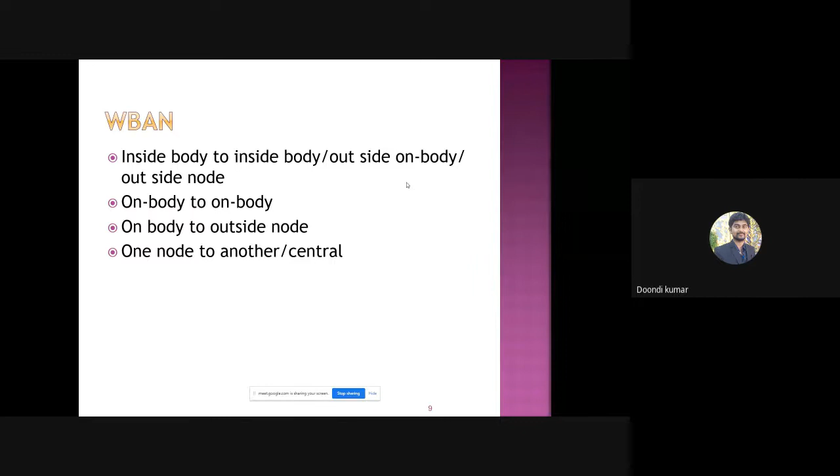Now, the main thing any researcher struggling to work with flexible antennas faces is doubts in software: how you actually make a flexible design, how you actually work with a human phantom. You have a design and a particular flexible material, but that material may not be available in the libraries provided by our EM simulation tools, so how do you give it those properties?

Normal antenna design is something the majority of people are aware of, but when it comes to SAR settings, some people still have doubts how they can actually get the SAR setting in the software and get the SAR analysis properly.

And the most important thing is how to bend perfectly. Majority of the designs, when bending, the people working on bending who approach me also fail in one aspect: when they design the antenna, the simulated antenna and the measured antenna results are not in good agreement. There is a lot of deviation. This is the main problem they are facing.

So there is a difference between simulated data and measured data. That is because they are unable to make a proper bend. So how to do proper bending is the main concept one should learn when working with flexible antennas. That's what I'm going to stress first, and I will show you the required formulas to make a perfect bend, and then we can go further.

Before we go to the software, I will directly take you to the software and show you how to do it. After showing how to do it, and how we can get the different analyses, I will show you. First, you have to make a perfect bend. These two particular slides - if you thoroughly learn them, you can work on any kind of flexible antenna, any kind of conformal antenna, not only for medical applications but any kind of application.

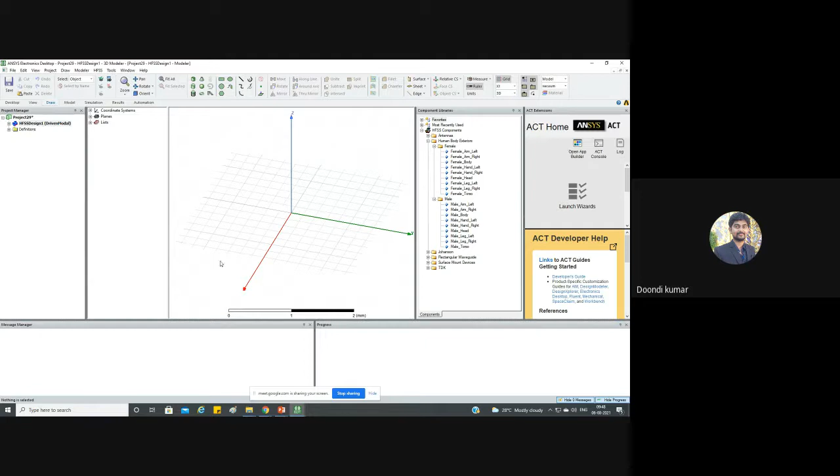So now I am going to make a cylinder here. So in this plane, that will be the YZ plane, so YZ plane I am selecting. Now I want to make a cylinder here, so take this cylinder from drawing cylinder. Click once, drag once, and again drag one more time and click. So you will get a cylinder.

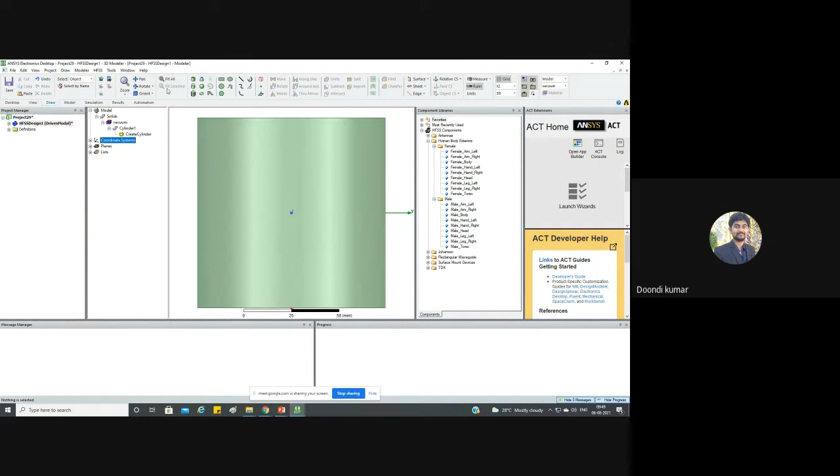Majority of my models, I will try to make the cylinder. So suppose if my width of my particular antenna substrate is 10 mm, I will make sure that 5 mm is on that side and 5 mm is on this side. So I always go in that way. So I will simply make minus 50 comma 0 comma 0, radius I will take some 50 mm, height I will take some 100 mm. So width of my antenna is 100 mm, and bending radius is 50 mm. This is the cylinder I have made.

Now I am coming to XY plane again. So this is the cylinder we have made. Now substrate thickness of my particular flexible substrate — you could take polydimethyl siloxane or some other flexible material, cloth, jeans cloth, or any flexible material you want to work with. So particularly suppose I am taking 1 mm or 2 mm thickness.

Let's select that particular cylinder, Control C, Control V. Just add 2 to your radius, and you are getting one more cylinder on top of it. Select the bigger one and then the smaller one, and you have all the options here. If you are using a lesser version, we are currently using the 19th version in our laboratory, so if you have a lesser version, just right click, edit, boolean, subtract. Otherwise you will have it directly here itself. So subtract, press OK. Now you have a bended cylinder.

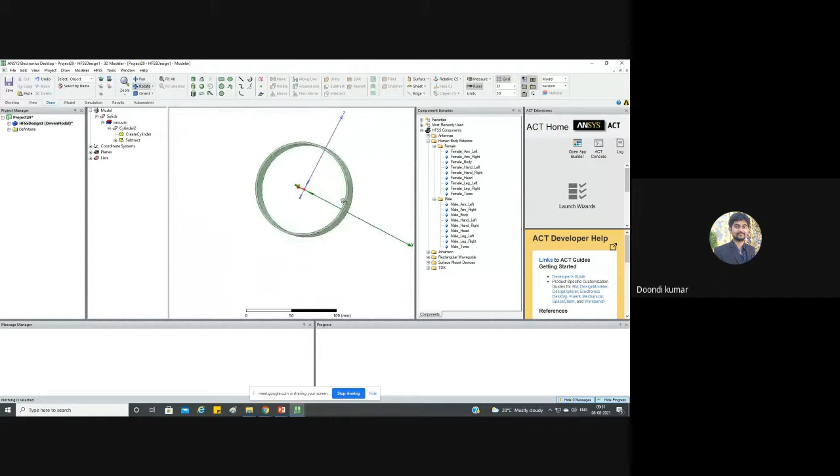Now if I want to cut here, let's give a little bit more width here. So if I want to cut here using a box, I have to draw a box again - dimetric. So I'm taking a box, I just clicked on it like this. Now this box, my X direction is 100 mm.

So minus 50 comma, exactly at X minus 50 I have to join, because minus 50 plus 50, total 100 diameter we have taken. So minus 50 plus 50, so X size will be here 100. That's what I'm trying to say. Here Y it will start at center.

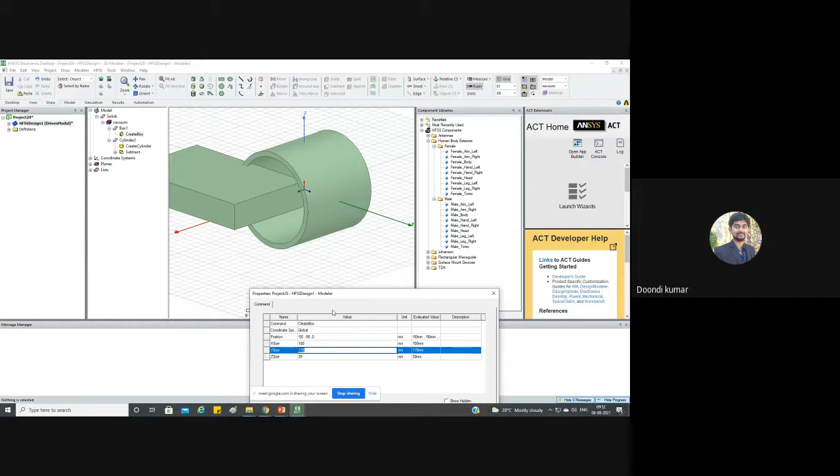Now front - if you see, definitely the inner length is less than the outer length. So in this aspect, I have developed one of my designs. I made one design, and from that I have taken double layer, triple layer, 4 layers also, because when it comes to phantom models we will be taking 4 layers like skin, fat, muscle, bone. So I have completed from single designs to 4 designs. I will show you from the single design front.

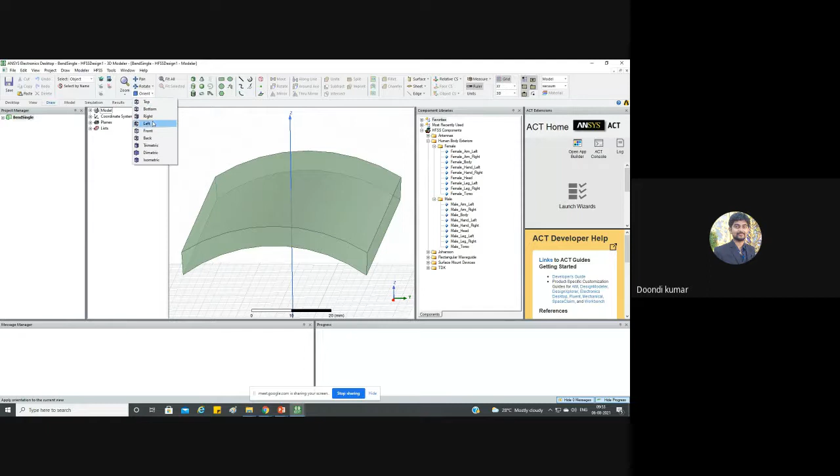Now this is my design. Let's go to our properties, design properties. See, these are the things that you will be requiring.

See, my radius is RA 40, so directly RA is nothing but R by 2 in our equation. Sx is nothing but width of my substrate, 100. Sy is nothing but length of my substrate, 50, and h equal to 5, that means substrate thickness. Here theta 1, theta 2 - as shown in the previous slides, theta 1 equal to length by 2 by radius into 180 by pi. Theta 2 is nothing but length by 2 by radius plus thickness of substrate into 180 by pi.

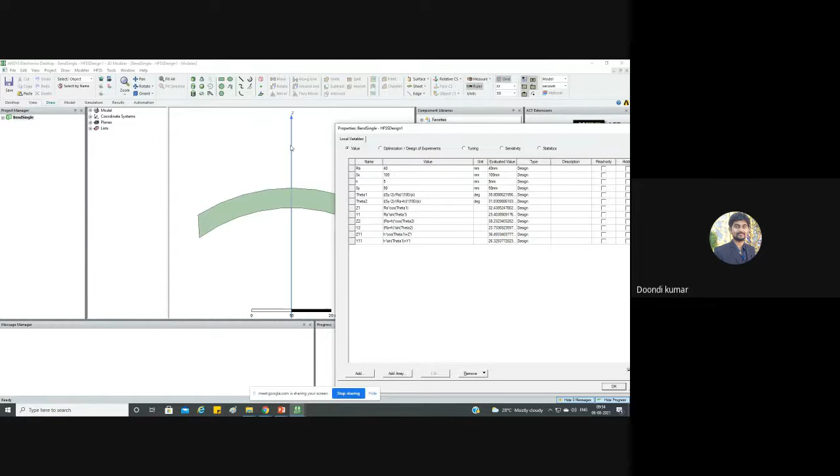Same equation. There x1, y1 - here the orientation I took in yz direction, so z1 is RA into cos theta 1, y1 equal to RA into sin theta 1. Same equations as what I mentioned in the PPT, only I have given them here. So these are the same equations, we just gave them as variables here. How you give them I will show you in this design, then I will come to this one.

So here instead of all of this, you can give like this. So this will be my Sx. Instead of 50, I will give Sx by 2. That means substrate width, it is length, and I am giving 100 mm.

So 100 mm, press OK. Now here radius is 56 because it is outside one. So original radius we gave is inner radius 50 mm, and height we have given is 6 mm. So here it will be nothing but R plus H. Press down arrow.

Sorry, I will add here and give. So 2 variables, it's not declared. So you can give here HFSS design properties, add, take the radius RR, suppose length units is length mm, and give radius as 50 mm. Press OK. Similarly add height H, I mean thickness of the substrate, again length, and give 6.

Press OK. After giving the variables, you have to give in HFSS design properties, add and give the variables, select the quantity, length. If it is angle, select radian. So here, instead of 50, you can press RR plus H. So automatically 56 will come there. So this is it. Now this is minus Sx by 2.

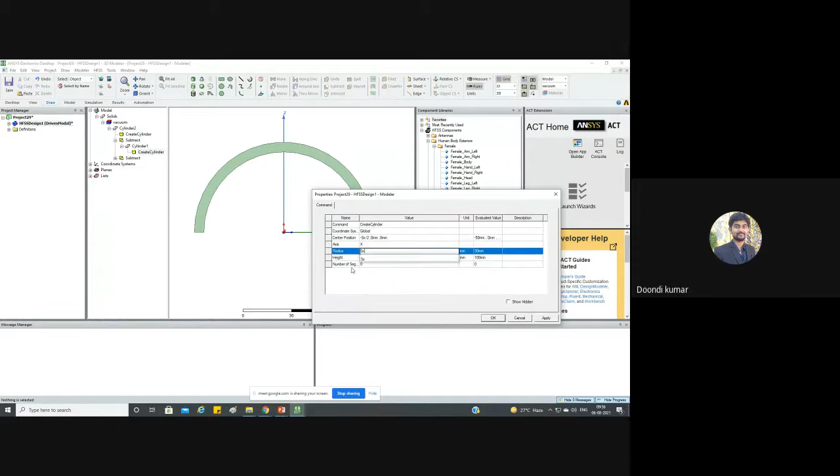Here it is nothing but Sx. So this is how the variables you can give. Now similarly you can give here also for inside cylinder. Here also you can give minus Sx by 2. This will be Sx. This will be RR radius plus OK. In a similar way we can give here also box.

So box here also Sx by 2. This one is RR plus H, sorry, RR minus H. Here nothing but Sx. Here 2 into RR plus H. So double, so total radius you are taking it double. So here again minus RR minus H. So this is how you have to give all the variables.

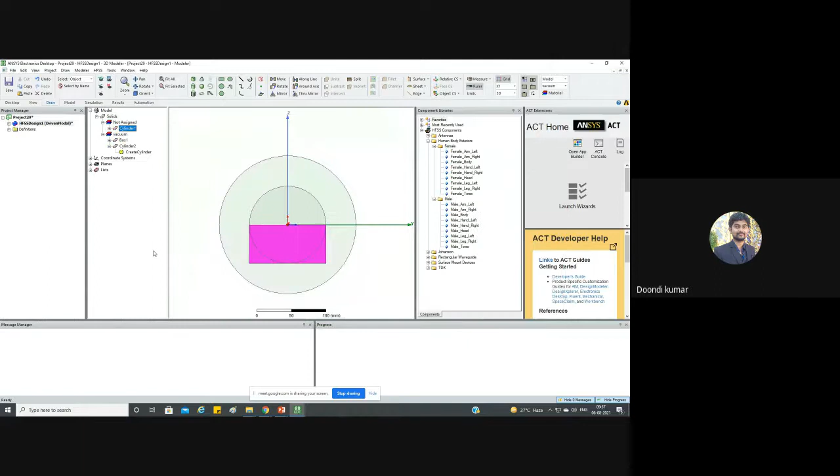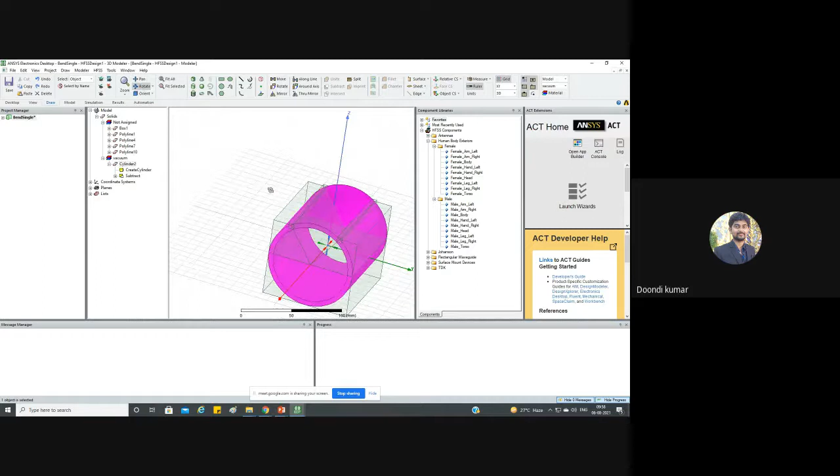So first I have taken only cylinder. Next, I have taken the second cylinder. So from first cylinder, I have deducted the second cylinder. So then I got only the cylinder part, only the cylinder part. So from there I have deducted the box, only this one. So again, then I got only this particular part. Okay, this particular part.

So from center, I have taken the direct lines, as I said. So there will be extra point left behind. But even then we have taken the direct lines and try to calculate both sides. If you calculate this side, automatically this side equations will come. So if you want to know, these are the coordinates that we have given here. So take this one. See, so y double dash and z double dash.

Those are the coordinates calculated for here. So each of those values we have given. So if you are taking one place, automatically left side, if you are giving if this is minus y, this is plus y. Automatically, if you are adding negative side, it will come to other side. So you have to calculate one side, automatically give the negative y only, you change copy paste and you give the y side negative, automatically this side design will come.

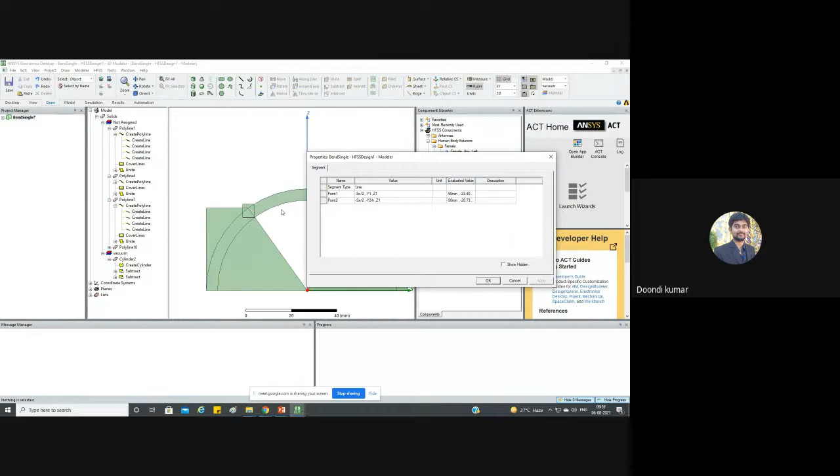So that was the design that we have followed. Similarly for here also same thing. So bottom coordinate is y1, z1. So outer coordinate is nothing but our outer coordinate is y double dash z double dash. The same coordinates are given here. Under this extra, first based on the straight line we have deducted. Now then I have deducted the extra part. This is the design that we have made using completely with variables.

Now if somebody wants to work with 50 mm by 50 mm size antenna, then simply he can go to SX, give 50, SY is 50 already. Radius of bending also, if somebody wants to give 50, enter 50, press OK. Automatically it will adjust. Somebody wants to give thickness only 1 mm. H, 5 mm is there, thickness 1 mm I am giving. See, thickness is changed to 1 mm.

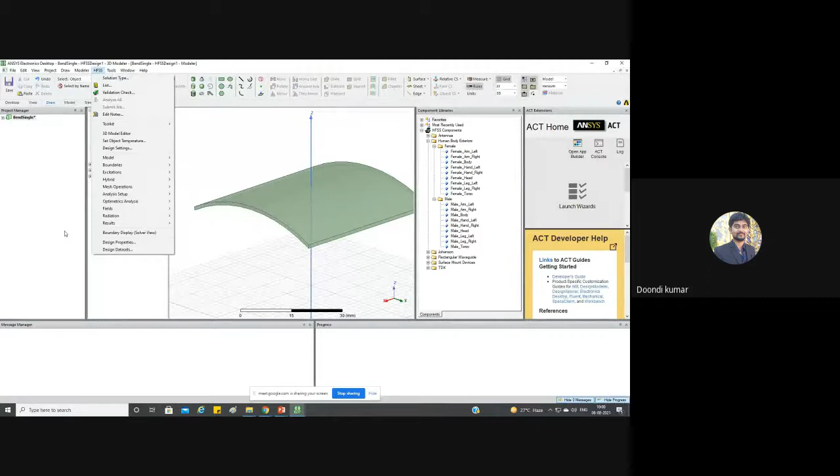Somebody wants to work with implantable antenna or endoscopy antenna and they need a conformal small scale antenna. So in that case, they want only some 7 mm antenna, 7 mm by 7 mm, and thickness is only 0.2, they are giving, suppose. Press OK. So it is almost invisible. You press Ctrl D. See, this is the smallest size.

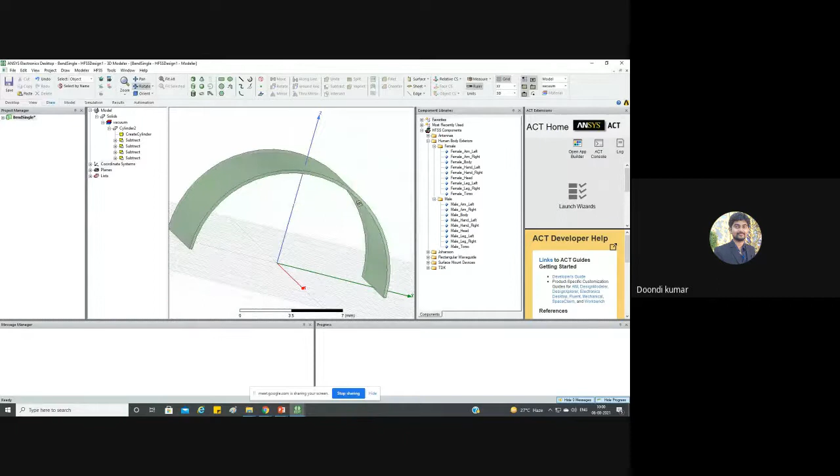So this is just 7 mm by 7 mm, just like a peanut size. Any value you give for radius, overall bending radius, or substrate thickness, or if you want to vary the overall size, everything you can change and you can get your bended design.

Similarly, what I did for the double layer, triple layer is: for the first antenna, the height is h. If I am putting one more substrate on top of it, the radius of the second layer will be RA plus h. Suppose I have only one layer here, and now somebody wants to make a second layer on top of it. They can take the first radius as RA, and on top of it substrate is there, so total is RA plus H. So if somebody wants to put another layer on top, the starting radius of that second layer will be RA plus H.

So the top radius of that second layer will be whatever the thickness is. Suppose H is thickness for the first layer, let's give HT for the second one. Then that value will be RA plus H plus HT, for the second layer. So you just give RA plus H as the radius of second layer, then give the thickness for the second layer and add it for the theta 2 equations. Same equations, you repeat, but give variable names differently, then automatically the second layer will come.

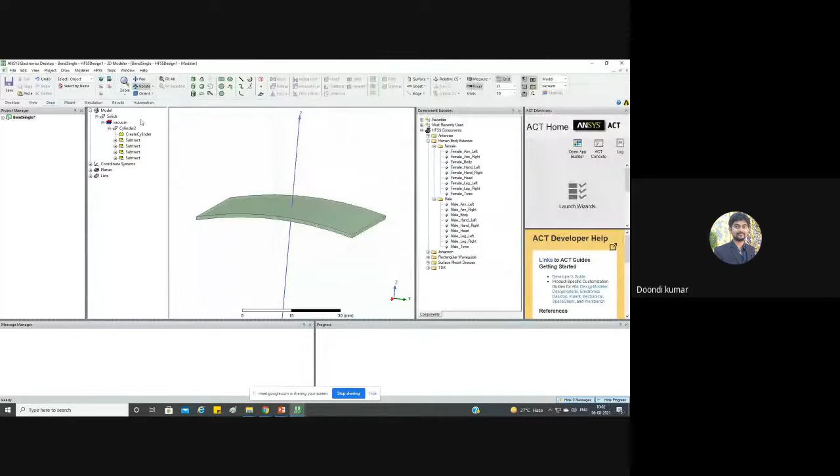Automatically the second layer will come, then you go for the third layer. Just give the variable names differently, and you keep going for 3 layers, 4 layers, any number of layers you wish. This is the perfect bending we have to make if we want our simulated data and measured data to be in sync. This is exactly what we need.

Before we go further, let's see how. So I have my substrate. There will be some materials already inside our simulation tool, but if I'm particularly synthesizing my own material, suppose I'm trying to mix polymer with graphene oxide impurities, sometimes I mix with TiO2, some people mix with Fe3O4, or barium titanium oxide. So different kinds of metal oxides I can mix, so that I can change the dielectric constant of my antenna from lower to higher, around 10, based on the impurity weight ratio I add.

So when making a substrate, I have to check the dielectric constant of my material. There are different dielectric constant measurement techniques and equipment. One of the most commonly used: before we make this polymer sheet, it's usually in semi-liquid form, so you can use the dielectric probe kit to get the dielectric constant over a frequency range from 10 Hz to 18 GHz or 60 GHz, based on the kit you have. So if somebody wants to work with a medical antenna at 2.45 GHz or 430 MHz, he measures his polymer's dielectric constant over frequency, and at 430 MHz he knows the dielectric constant of his material. Then how do you enter that dielectric property value in the software?

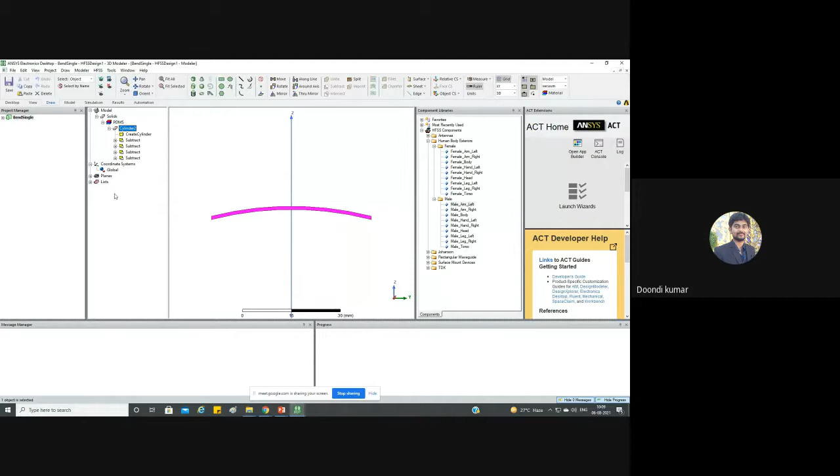So whatever frequency you are working at, you will already be aware. Based on that particular frequency value, what is the decay of your material as well as the tissues, you have to give here. Now I will show you the source settings also, but before that, let me show you how you can actually put the antenna on top of this conformal substrate.

Let me change the radius a little bit here, 50. So this is my radius. Okay, now I am taking a patch. Suppose this is my patch. I am drawing my patch.

So for my patch, I am going to give minus 10 mm, comma. Suppose just I am taking some random value, minus 10, comma, some 60. This is 20 and 20.

Now for it to wrap on top of it, you have to select your substrate first and then select your patch and go for sheets here - wrap sheet. Wrap sheet, for visibility purpose, just change its color. So this is how you wrap your antenna on top of your substrate.

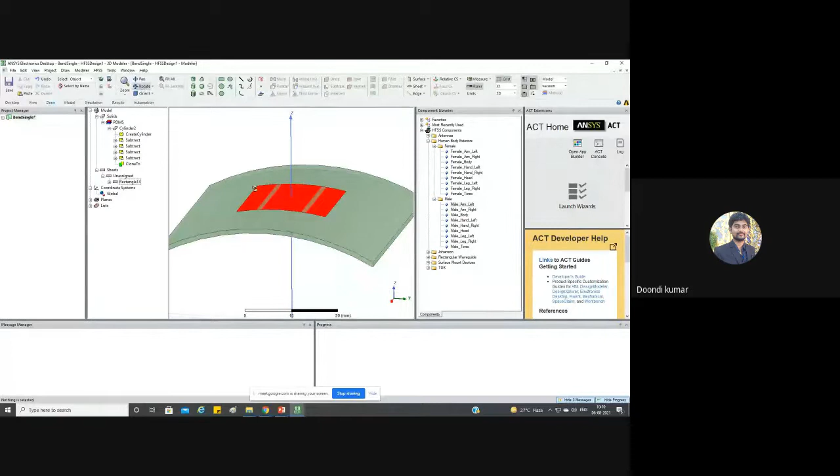Suppose if you are having a ground, then put the ground below it. So I have given the Z value 60. You give the value below that. So I'm just coming back to it.

Now I'm giving just some 20 or something. So now you select it and select again, go for sheet, wrap sheet. So it will come down. But here Z you have to adjust so that you place it exactly at your ground. Based on the length, you have to put it and it will wrap exactly here.

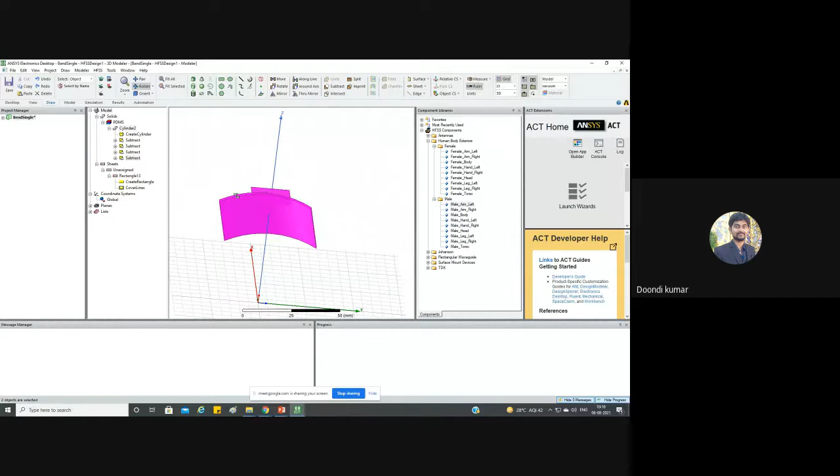So if you want to put it on top, you have to make sure your patch is on top. If you want to put it on bottom, make sure accordingly. So based on your own preferences, you have to put it - whether you are wrapping on the top side or the bottom side, you have to be aware, and based on that, you have to give the settings.

But here, one of the main problems the majority of researchers will face is when you want a different kind of conductive material. So most people will select it directly and give boundary condition perfect E so that it will act as a conductor - that's the simple way everybody will follow. Suppose if somebody wants to give a thickness, and they want to give some copper coating or some silver coating, and place it inside the capsule or somewhere.

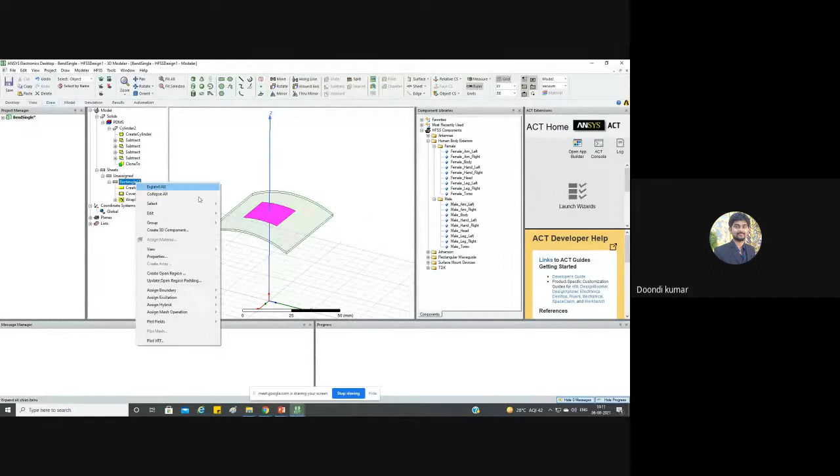So they want to get a wearable antenna, but they want to coat it with silver nanoparticles, with 30 micrometer thickness or some 20 micrometer thickness. For that case, after wrapping, simply select your patch, right click, right click again, go to thicken sheet, give thickness 30 micrometer, select instead of mm, press OK, and automatically it will come.

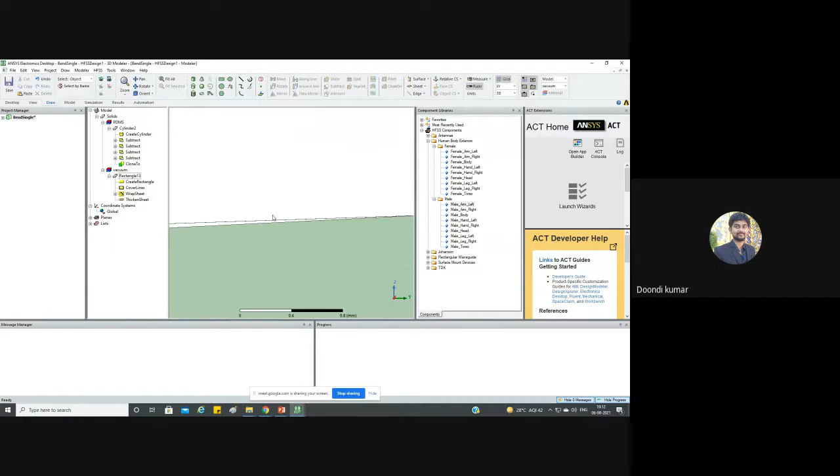Automatically it is assigned into vacuum because it has just become a thickness, so that particular copper foil has become solid instead of a sheet. Initially it will always be vacuum. You select again and go to edit material and do your silver nanoparticle conductivity settings, and it will work.

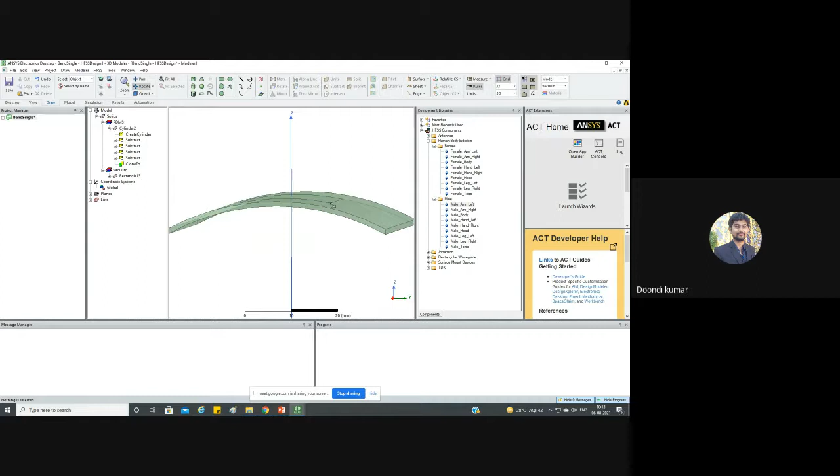Now another thing, suppose somebody is working with endoscopy antenna or implant antenna. In order to miniaturize and shift the resonance frequency lower, because the antenna will be very small, we majorly follow giving vias and using a high dielectric constant substrate as well as superstrate. So on top of our patch antenna, we usually put another substrate, which we call a superstrate, and a second layer will be there.

Now in such cases, this particular patch will intersect with the superstrate. What you have to do is just copy paste the same thing, whatever superstrate material you gave, and give that same material here. Suppose you are having PDMS, put the PDMS. Then from the top superstrate, deduct this newly created patch part, and the intersection error will go away. This is the particular error everybody will face, so whatever intersecting patch portion is there, you have to remove it from the superstrate so that it will work fine.

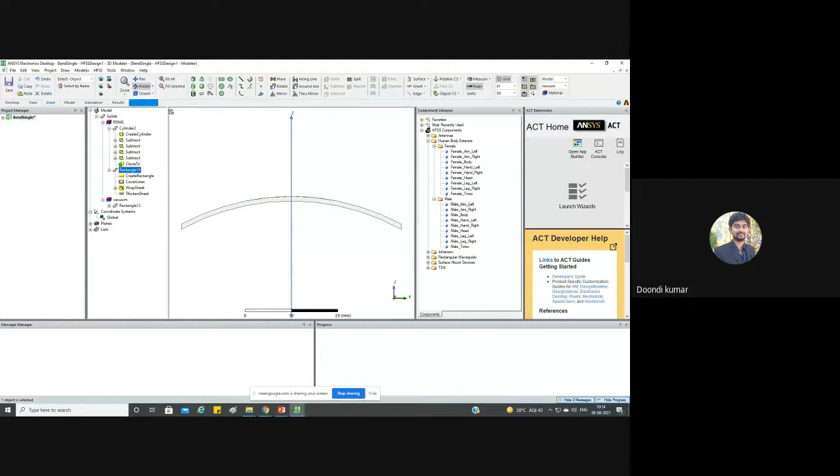Now for a flexible antenna, working for medical applications, you either bend your antenna in the XY direction or in the YZ direction, so X direction or Y direction, two directions one can bend. Suppose I have my strip line here, I give my feed, I bend in this orientation, and I give my strip line and port here. Similarly, somebody wants to bend in Y direction and their strip line is here, and they want to give port here. So this port assignment is another problem majority of the people will face.

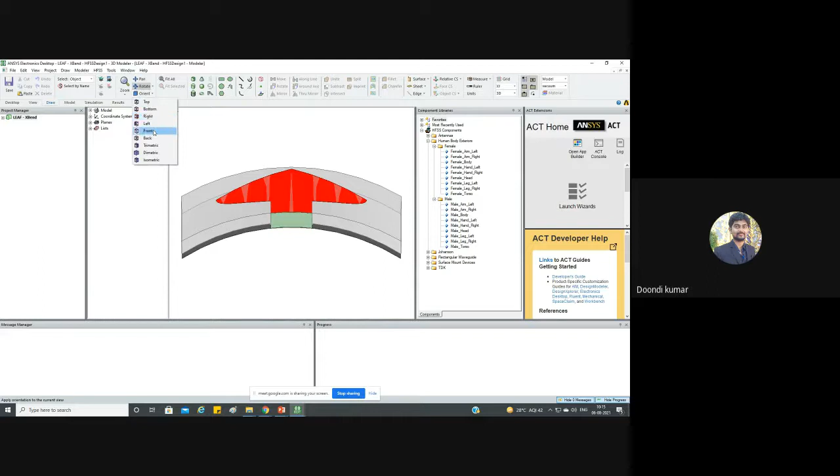Let us see how you can give the port here. In case of this particular X bending, your port is here. Front view, I am pressing Control D. So here the entire model, whatever we have done for 3D substrate preparation, the same 3D preparation I have to do for the particular port calculation in a 2D way. If you follow, instead of cylinder, I will be taking a circle. Same process, everything is the same process.

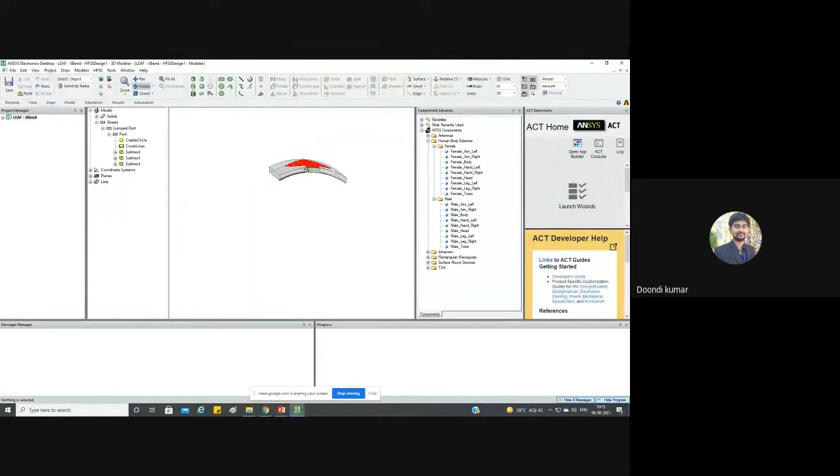So what you are having is in a single dimension. Whatever calculations and equations I used for making the cylinder, the same ones I am doing again in a 2D manner. Instead of taking solids, I am taking sheets. Same thing again, repeat: take the first circle and the second circle, subtract, you will get the ring, then remove the box part, the half rectangular part, then remove that side and this side, and you will get the exact one. This is how the port calculations are made, and this can be given here.

In a similar way, this one is quite easy, because you need to know this coordinate and that coordinate and give a polyline. So in this case, what I normally do is go to right view and take lines: one line, second line, third line, fourth line, and mix the lines. Now I need to give this coordinate and then this coordinate, similarly for the bottom coordinate and bottom coordinate. What are exactly these coordinates? Come to front view, isn't it nothing but x dash y dash in our equation? It is nothing but y double dash x double dash. Same equations only you will be giving here.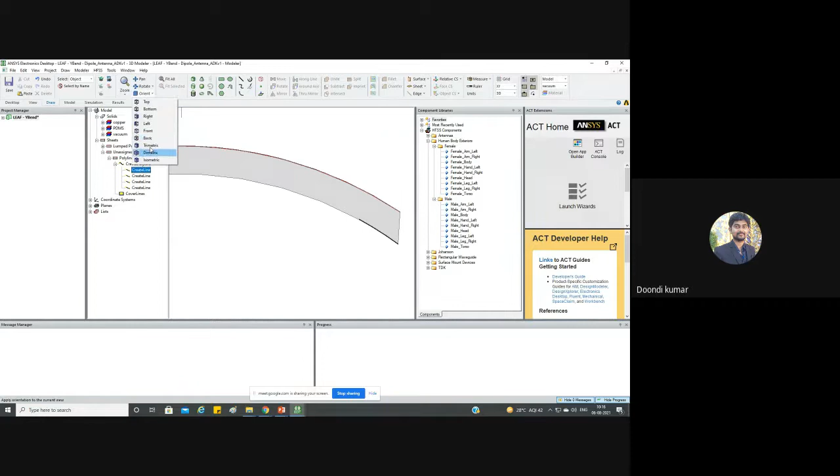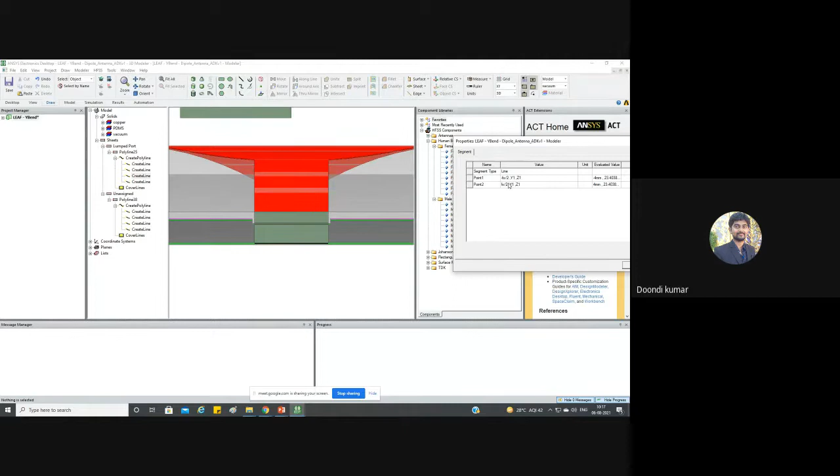And you can see, on the right side I am going again. You can see our port. Nothing special, just because I wanted to give a different notation, instead of double dash I gave 2, so Y2 is nothing but double dash. So top is double dash, similarly for the bottom line, single one is dash. So Y1 Z1, Y2 Z2, same equations that we calculated, you just give them and give the coordinates directly. It will take and adjust as well.

Now the one particular problem you may face here is while giving the excitation, lumped port, and trying to draw a new line, it won't take the line. Because this is actually a slant condition, that port is actually slant. It is bended as per your bending radius, and that particular port automatically bends.

Suppose I will show you, I'm going to change the bending radius. We change the radius to some value, say 50, Control D. See, it's changed, and automatically the port is also adjusting. Your entire patch also will adjust, everything will adjust. So in this case, what you do is select the bottom line, and instead of Y1, you give 2.

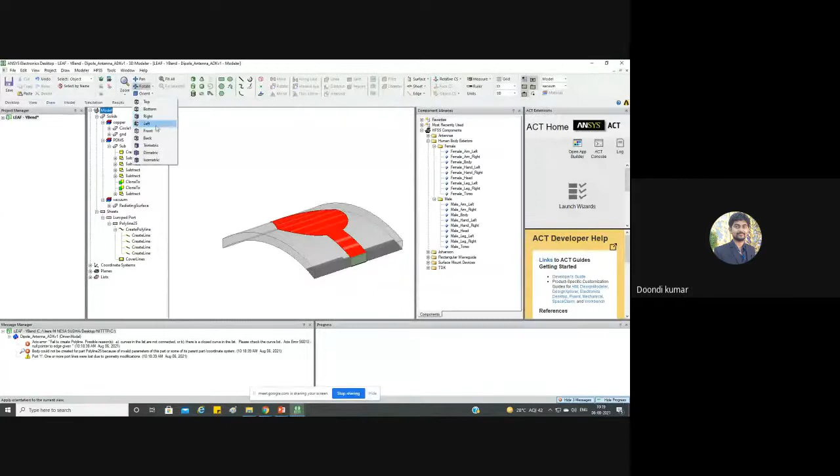See, now instead of slant, it is just perpendicular. So make it perpendicular, and then you can give your feed easily. Make it perpendicular and select that particular polyline. Now you can easily give assign boundary, assign excitation, lumped port, next, length, so you can give it. After giving this excitation, just change this Y2 back to Y1, and then it will adjust automatically.

So again, you can see from front view, it is adjusted. So this is one problem that you will be facing. X bend port is simple, but Y bend port is the problem you will face, because the port line is actually slant. So make it straight, give the excitation, and then again change the coordinate, it will adjust. These are the things you need for making a perfect bending and wrapping the antenna patch or ground, and giving a port and all.

So I also showed you how to give your substrate values, new materials, skin value, or any other tissue value. So here itself I will show you how you can actually give SAR settings also, then I will go to further analysis.

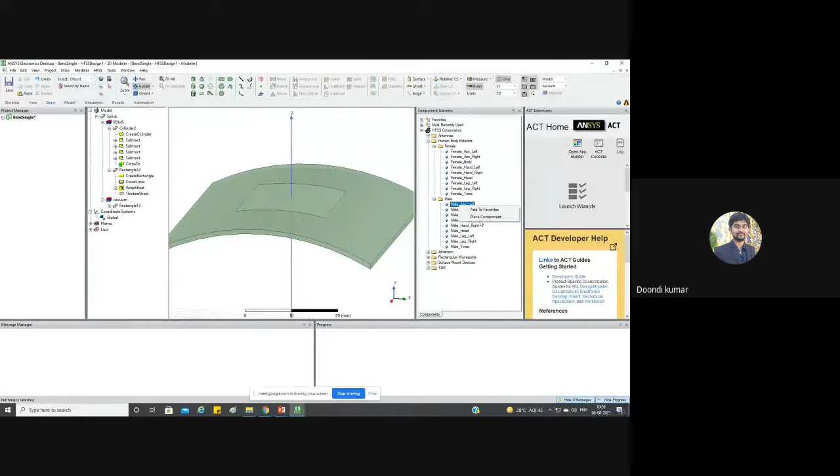So I will take a male phantom, place component, press OK. This has come here, I want to put it here. Now you just take assign, edit, arrange, rotate. First I will rotate 90 degrees, so it is rotated. Again edit, arrange, rotate, so I rotated again. Now I want to move it here, edit, arrange, move.

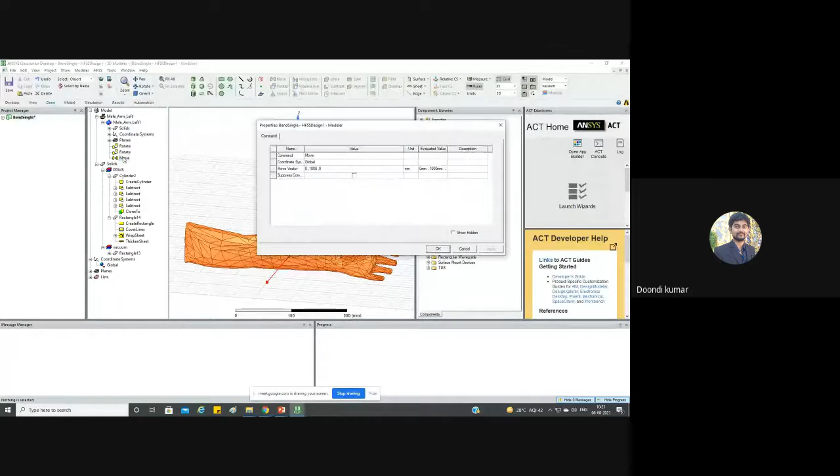So this move option, you can change it here. In the Y direction, you can change some 1000, so you have to adjust it. You can keep on moving these coordinates so that you can actually put your antenna on top of this particular phantom. All you have to do is use the move coordinate option, and give the coordinates, keep changing the coordinate until you place it on the appropriate position.

Once you position it, you have to select your antenna, or your particular part, human body part, and go for modeler, list, create, object list. So simple, this is how you make proper SAR settings. You have to select your phantom model, whether it's skin, fat, muscle, all these things, or you select a head, or a colon, or you can select a torso part. Any phantom model you want to work with, select it, go to modeler, go to list, create, object list. Then this is created into a list.

Now you have to go to fields, SAR settings. In the SAR settings, you will get the object list one, the list we have created. So this hand we created into object list one, that we are adding here.

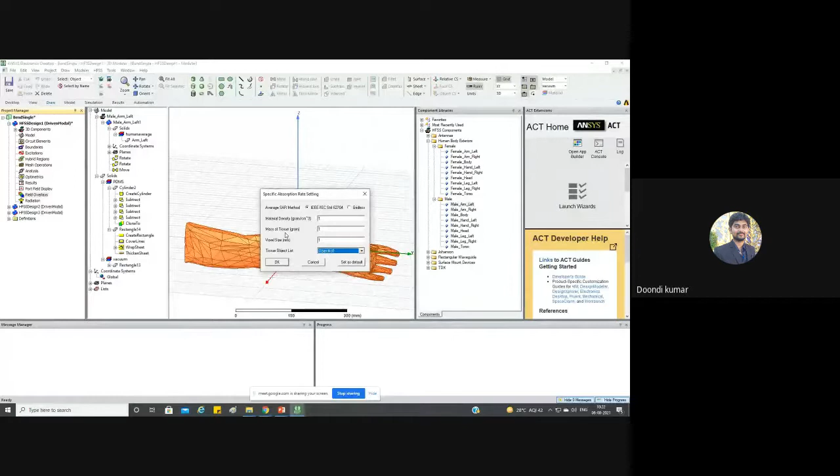As per FCC standards, if you are calculating from 1 gram, you put 1 gram. If you want to calculate as per European Commission, then you put 10 grams. So this is where you change the value, 1 gram or 10 grams, it's up to you. If you want to put both and compare the SAR value over the 1 gram volume tissue or 10 gram volume tissue, it's up to you. As per FCC standards, the maximum allowable SAR is 1.6 watts per kg over 1 gram volume tissue. For the European Commission, it is usually 2 watts per kg, but measured over the volume of 10 gram of tissue. So whether you follow this one or that one, or want to compare both, it's fine.

But usually you have to select your phantom, go to modeler, create list, and then go to field overlays, go for SAR settings, select that object list, and press OK.

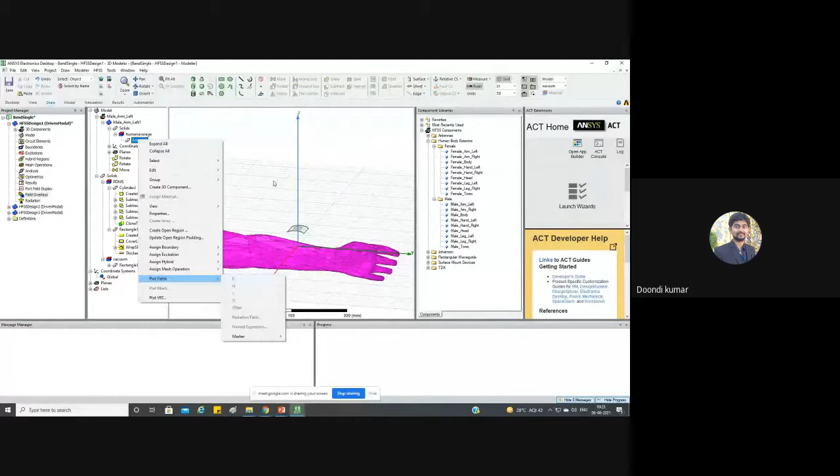Once it is done, you simulate it. After simulation, go for your phantom model, plot fields. Since it's not simulated, it will be highlighted if it's simulated. Others, then you will get the average SAR. So click on the average SAR and press OK. Your SAR will be done.

So that is a simple way to take your SAR value for flexible antennas for wearable or medical applications. These are the basic options I want to tell you. I will go further inside. Let us come back to our PPT so that I can show you a few things, then we can go for biotelemetry and other things also.

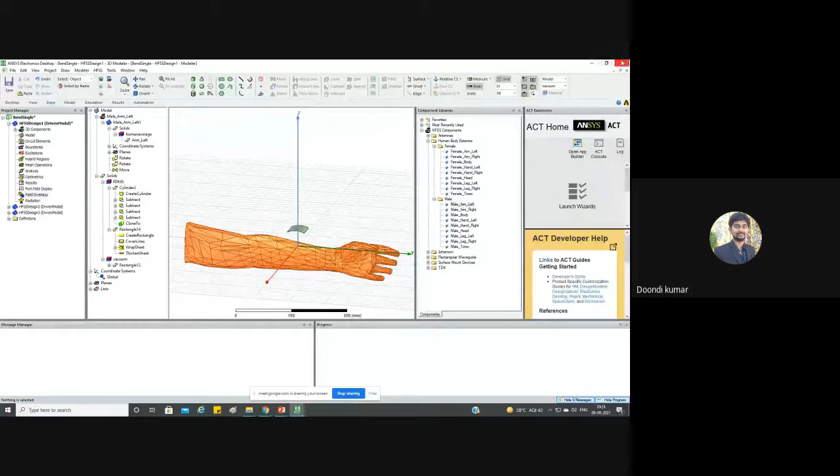So now let us come back to our slides. When you are working with wearable antenna, there are a couple of common things you will be facing. One thing is when you have an antenna, you simulated it in a flat condition, but when you bend it, the antenna may not have the same reflection coefficient. It may shift. That is one point you have to adjust.

Another thing is, suppose I take an example. This is one of my published papers in Wiley. I will show you this, with metamaterial backside and without metamaterial backside. Let me show you results.

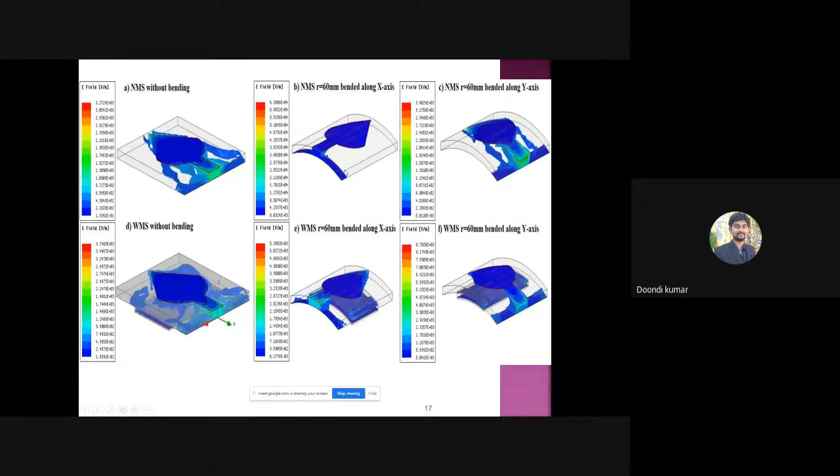So I have taken flat condition with metamaterial and without metamaterial. I have bended in X direction as well as Y direction, so both directions. See, in a flat condition, it is exactly at 2.45, but when I bend it, it is shifting. Whether it is with metamaterial or without metamaterial, in both cases it is bending, and the result is shifting too much. Just to show you the effect, I am showing you this. Then I will show you how we mitigate it out.

Now, effects of human body. Not only bending, the human body presence will also affect our overall radiation efficiency, our overall performance of S11, and impedance matching will change, because the dielectric constant of our human body is usually very higher. Because of that, the overall pattern will change, efficiency will change, because some of the radiation energy is being absorbed by our human body. So due to high dielectric properties of our human body, the impedance matching of the antenna will get affected.

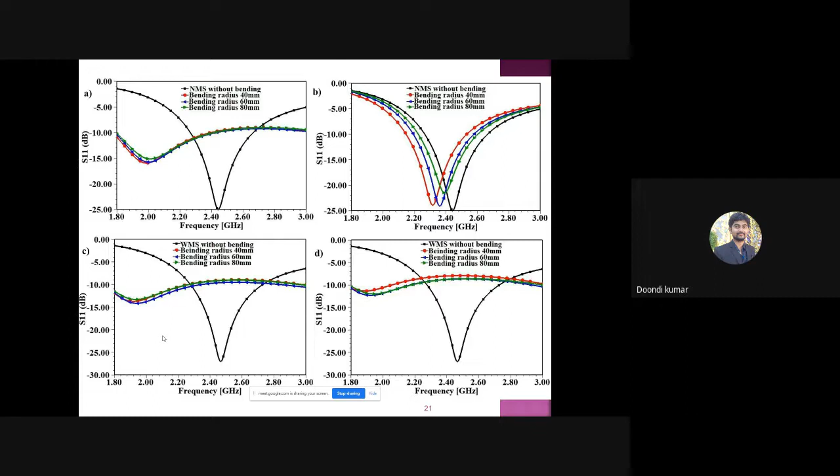So these are the reasons your results will shift. This is the common effect anybody will face when working with flexible antenna for wearables: one is bending, and the other is on-body effect. So you have to design an antenna that can sustain both bending effects as well as the body loading effects and can still operate at the same frequency. That should be your primary criteria when working with conformal and flexible antennas for wearable technology.

So same thing, I have given hand, I have observed the SAR values at different bending radii and different distances also. Now another thing I usually take for conformal antennas for wearable technology is how the patterns will change, how the coupling of antenna signal strength will change when we are putting the antenna on an actual human phantom.

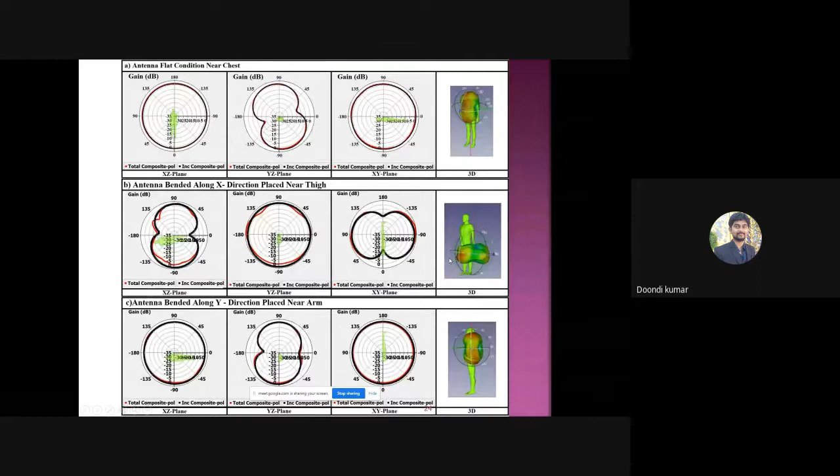So either it be chest or leg or hand, with respect to the overall human presence, how the pattern will change when a person is present. This I have taken in HFSS, with respect to chest part, with respect to leg presence, with respect to hand. So based on the different positions on the human body, this is how the radiation pattern is reconfiguring based on the presence of our human body, that we calculated.

So this is the phantom model, and this is the antenna model that we have designed. This is the copper foil that we have used, with 0.03 millimeter thickness. You can get high grade copper foils through any online media; we can get 0.03 thickness or 0.05 thickness also fine.

In order to cut based on our exact dimensions, we usually go for EDM tool cutting, electrical discharge machining cutting. This is usually what mechanical people will use. So you have to give your CAD model to them, then they will make your copper foil into 20 stacks or 30 stacks and place them in between two iron plates, and they will give the DXF file and it will cut as per your DXF file.

And you can take them and attach to your polymer. I have taken polydimethylsiloxane transparent polymer and attached that with binding, so you can make use of any binders or glues. So we made that, and we measured and simulated, and we presented in Wiley.

Now, the previous antenna has shown you how the bending causes a change in reflection coefficient, and how the human body presence causes a change in reflection coefficient. Now let's see, I have used it in this design.

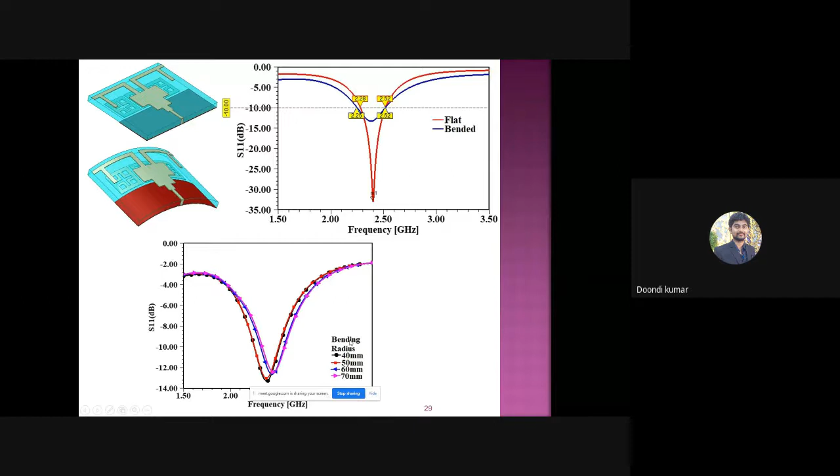I have taken only a single layer, with metamaterial units on the backside of my antenna. In flat condition and bended condition, the impedance matching is a little bit reduced in bended condition, but the frequency of operation is still at 2.45. With different bending radii also, the frequency of operation maintains at 2.45.

Similarly on body, both flat condition and bended condition, the frequency of operation maintains in the same place. You make use of slots, metamaterial units, another layer on the backside, so somehow you have to mitigate or suppress that shift in the operating frequency, so that your antenna can work both in off-body and on-body condition at the same intended frequency of application. That is what you need to know for the wearable antenna.

Now, as I said, biotelemetry means you have two antennas: one antenna is monitoring the vitals and another antenna is receiving that information. So suppose my antenna here is transmitting, and my antenna here is receiving. This I have calculated in ANSYS HFSS, where you have an analysis called RX to TX, TX to RX coupling.

So the coupling analysis you have to highlight, and you have to set this antenna as transmitter and this antenna as receiver. The coupled energy in power, over the frequency range, is given here at 2.45, our operating frequency, where it will be maximum. The coupled energy is maximum.

This is to know how much distance it can transmit the signal, and whether the receiver is able to receive it effectively. That is what we are measuring. This is what people call communication link strength for wireless endoscope systems or implant systems, IMD systems. So TX to RX coupling is also something we have to be aware of.

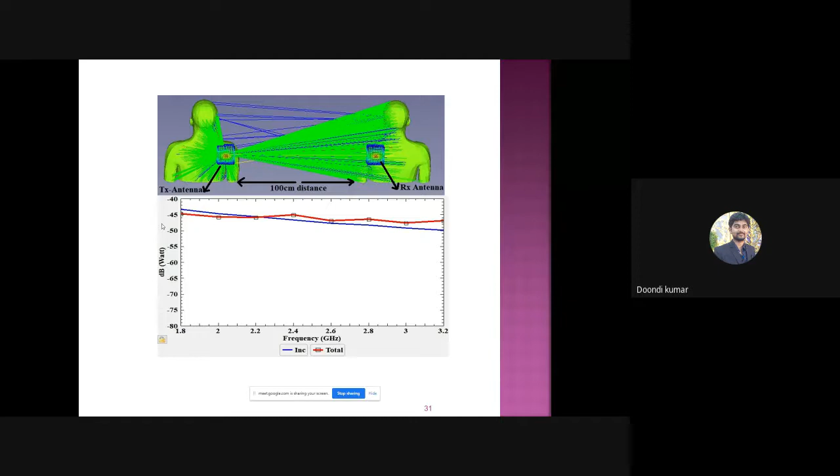In this aspect, I will just touch on how to do tumor detection, then I will directly go to endoscopy and implant, because that is what I want to show primarily. So the tumor part I will go through faster. Three points I will show you: tumor detection, endoscopy, implant, how the endoscopy antenna can transmit the received signal to outside, and how we can actually verify that signal strength.

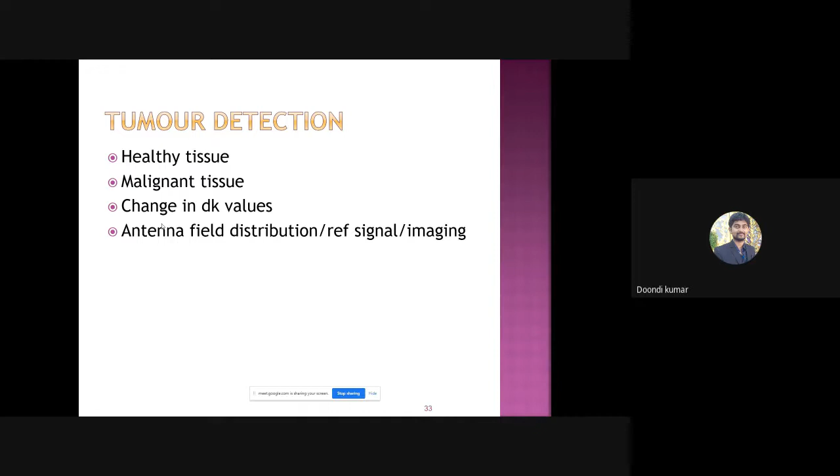Now for tumor detection, you need to be aware of healthy tissue properties as well as malignant or affected tissue, cancer tissue, or tumor tissue. The change in dk value is the main thing that enables us to diagnose whether the tumor is there or not. It can be done either through field distribution or reference signal through RX-TX transmission, and taking images through a tomographic view in 360 degrees. Either way, you can follow up and tell whether the tumor is there or not. Beyond that, you can determine how much size it is, what place it is inside, and all further, by deploying more antennas in 360 degrees.

So let's see, I have taken one DRA antenna, and tuned it exactly to 2.45. Here, for skin, fat, muscle, bone tissues, I have taken healthy tissue values from the same website I showed you a few minutes back. I have taken the skin layered, hand, and breast models also, just to prove that the SAR values are as per the standards.

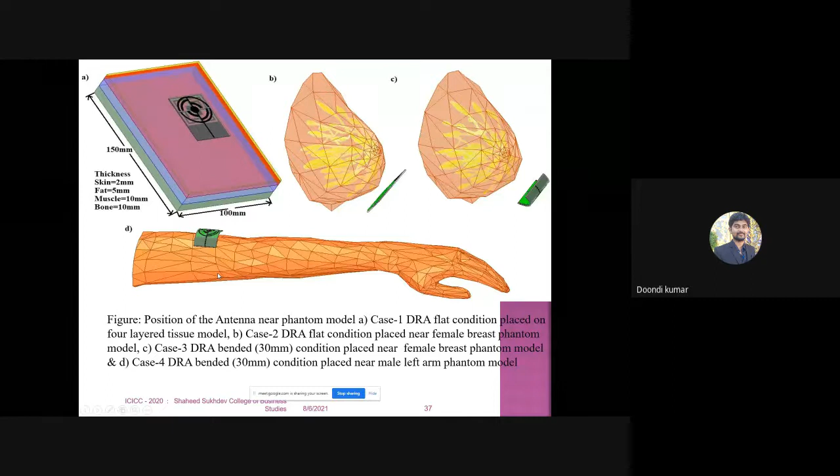So the SAR values are all with 100 milliwatts input power. The SAR value is below 1.6 for all cases. Then I have taken a tumor with tumor dielectric tissues. Cancer tissue will have very high dielectric properties, so high dielectric tissue and the conductivity also will be high. So tumor tissue is inside, comparing normal condition versus tumor condition.

The E field will be changing drastically. Similarly, current distribution also will change, and the distribution in the place also will change. There is a change in distribution also, you can observe that. You can see that in a zoomed version - the field without the tumor versus the field with the tumor.

Another approach is you can put two antennas, one as a transmitting antenna and one as a receiver antenna. When passing through healthy tissue, the received signal will be different than when passing through malignant tissue. The difference between the received signal in the healthy tissue condition versus when malignant tissue is present - that differential signal can be the fundamental aspect in detecting whether the tissue has any malignant tissue inside or not.

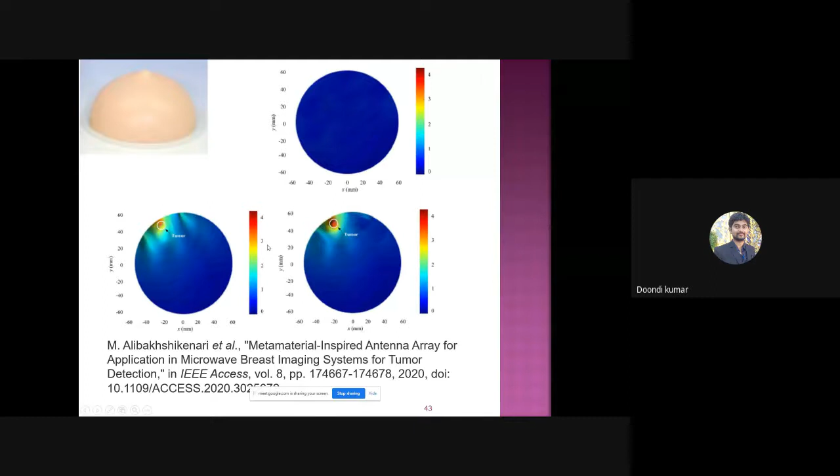In a similar way, you can take 6 or 8 antennas around the breast phantom, take the images, reconstruct them, and point out whether the tumor is present and where it is. You can further optimize the images also. This is a simple way you can go for tumor detection.

You can actually create this particular model in a flexible manner also - skin phantom, or skin-fat-muscle board. You can use the same single layer design and duplicate it to put 4 layers, or otherwise individually make use of the same equations, change the variable names, and create 4 layers in a flexible manner. You can do the same thing and present it for SAR analysis in flexible conditions.

So that's the one thing I want to show. Now for implant and endoscopy, I will show you the results part. Then I will show you how exactly you can take the capsule model and put these things inside the software also. In probably another 10 minutes I will try to show you the entire things and then directly show you in the software how I was doing this work.

Normally, if an implant is a skin implant, it is non-deep - it is not too deep inside your tissue, just under your skin. Most capsule models will follow this kind of flat pattern where the antenna is placed here, and your battery clip and your circuitry are placed there. The entire thing is placed in a flat model.

But if your implant is too deep inside your body, maximum you will go for this kind of capsule model where the antenna will be placed at one side opposite to the battery. One side you keep the battery, one side you keep the antenna. In between them you keep the remaining circuitry like sensory packs, electronic packs, other PCB boards, everything. So either you follow the capsule model for a deep tissue implant, or you follow the flat model for skin implants.

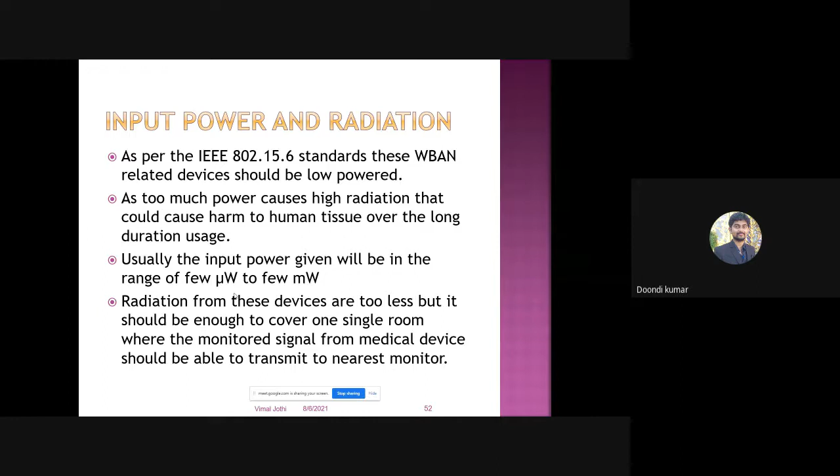So safety measurements you have to take care of when working with implant antennas or endoscopy antennas. As I said, for SAR, we will follow European Commission or FCC standards.

Mostly the materials I am using are super hydrophobic. As I said, super hydrophobic means it will not react with liquid atoms. So the outer area is super hydrophobic -- alumina, silica based components like Al2O3 are used as outer capsules so that they will not react with the human body. So it's a biocompatible model, so it will not harm the patient even if it stays for a longer time inside the body.

So these are things I already explained while going through it -- biocompatible model, substrate and superstrate you will use, pin wires you can use. So this entire antenna will be placed inside the tissue part, and then analysis will be taken.

So some people will take ethical permission to work on animals. Otherwise, you can take chicken breast for skin implants, and pork internals for endoscopy applications, or you can make your own saline-based dielectric solutions which will mimic skin or any other colon or stomach or any other tissue. You can make liquids also, and use them for measurements as well.

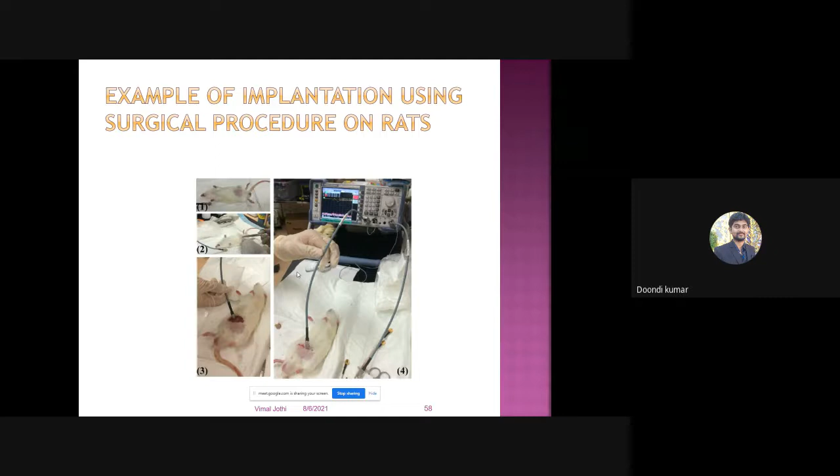So let me show you a few results. Now I am taking a small scale antenna. I placed it inside skin, I placed it inside fat, I placed it inside muscle. So here for this particular antenna, we are analyzing its S11.

When it is under the skin, this is the value. When it is under the fat, it is the value. When it is under the muscle, it is the value.

So based on the position, you have to retune your antenna based on that tissue. That particular dimension you can give and fabricate your antenna. You need to know if you want to work with skin, fat, or muscle. So the tissue dielectric properties matter.

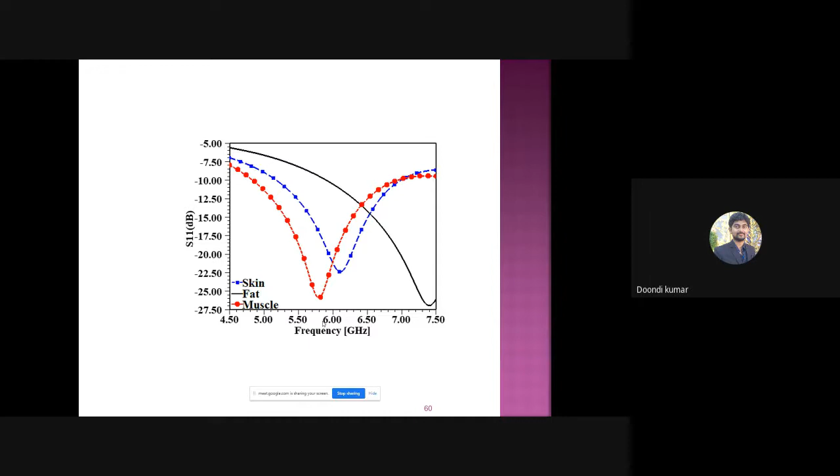If you simulate an antenna for skin and try to implant it in muscle, it won't work. So if you take muscle, you must take the muscle tissue and analyze your antenna, tune its parameters so that it works exactly at the frequency you want.

Implantable applications have different uses like health monitoring, medical diagnosis, neurostimulation, pacemakers, defibrillators. Several applications exist for implantable devices. Let me show you endoscopy also, and show you in the software how you can make these designs.

So for endoscopy, most of the simulations I have used, I have taken with circuit, and the entire endoscopy system I have taken. This particular endoscopy miniaturization, I have obtained very less, just 5 mm by 7 mm antennas.

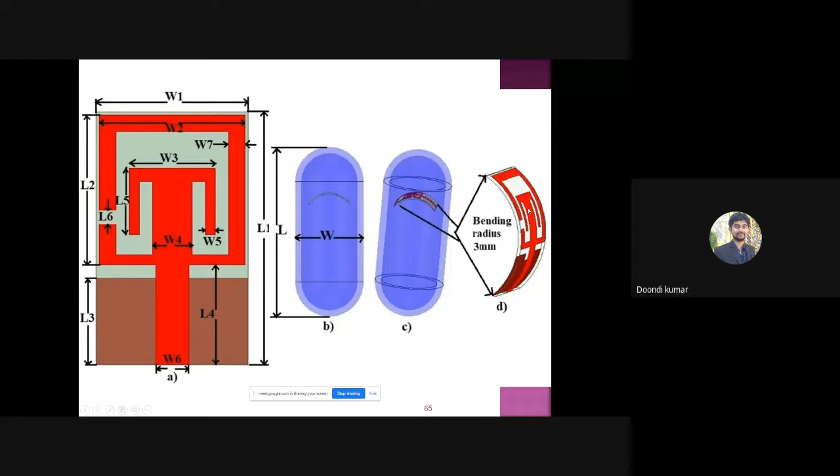So this is the first original antenna I have done and published, without circuit. The implantable antenna, just like the substrate model I have shown you, with a bending model I have used. I have taken a capsule, overlapped the antenna into the top patch and bottom ground, and taken the analysis.

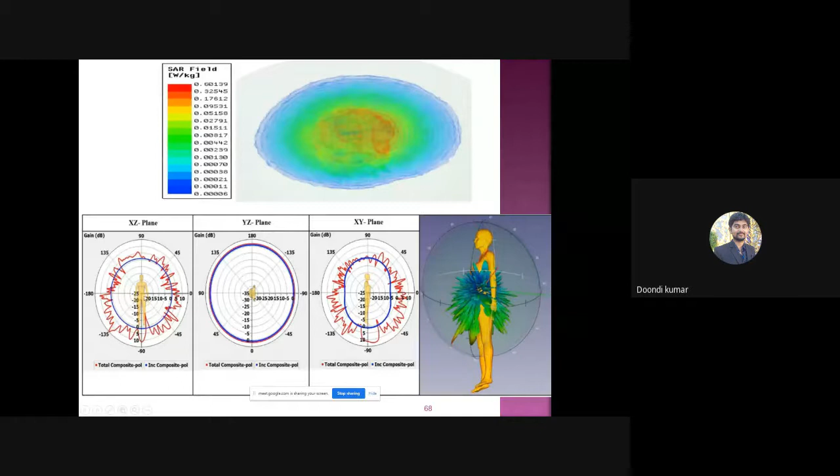Bending, various tilting - if our antenna is not soldered properly, the effects are presented. Similarly, its radiation pattern inside the human tissue, stomach tissue. Inside the stomach tissue, SAR values at 10 milliwatts, and based on the presence of the entire human body, radiation patterns.

So the fabricated antenna and its analysis under pork, minced pork, direct analysis - that I have presented and published.

Now let me show you further what we are doing, so that you can also do it in a similar way and go for bigger papers. Now, I am not highlighting the antenna here because it is in the revision process, so I didn't show you the antenna model.

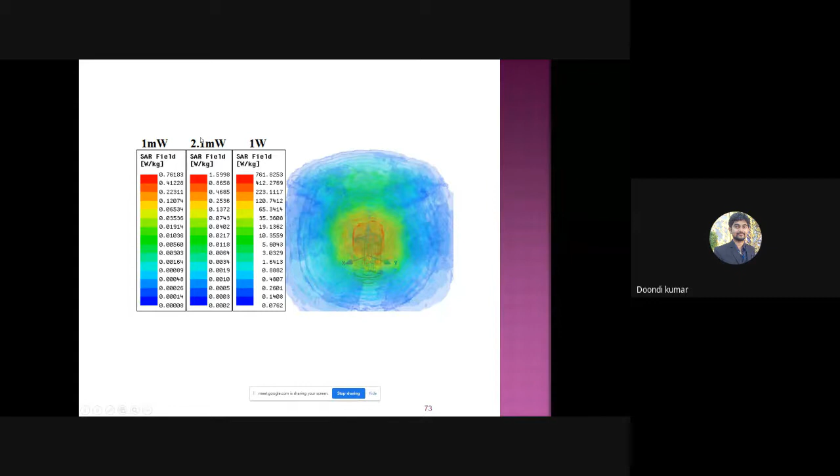Now for the same thing, the maximum input power I can give in this case is 2.1 milliwatts. Up to 2.1 milliwatts, it is maintained in the SAR value below 1.6. If I go above that, the SAR value will cross 1.6. So that means up to 2.1 milliwatts I can give as input power. But the prescribed minimum power is only 25 microwatts. That means my antenna has enough capability to maintain the SAR below the prescribed value.

Now, as you can see in the previous paper, when it is tilting, our antenna reflection coefficient actually changes. But in this particular new paper, what we were able to do is, whether it is tilting - even when fabricating, we may not be able to adjust and solder the antenna exactly in a centered way. It may tilt a little bit to that side or this side, any other side. So we have checked that.

This maintains the same reflection coefficient, but the impedance matching when the antenna is tilting this side is a little bit lesser compared to the remaining orientations. That means when the antenna is tilting towards the circuitry, the impedance matching degrades a little bit. That is one thing.

So I have to make sure when soldering it, that it is not tilting towards the circuitry board, so that I can avoid this impedance mismatching. So, similar model, you can see in the air with no circuit, with no stomach tissue presented, and with circuit presented and no circuit presented.

If you see these two values under the stomach, no circuit condition and circuit condition, there is a deviation. Some people detune that, presenting detuning of the implant antennas or endoscopic antennas. When you have an endoscopy antenna, once you swallow it, it will go through the gastrointestinal tract, passing through the stomach, colon, and small intestine. While passing through, the camera takes information of the inside organs and transmits it to the outside antenna.

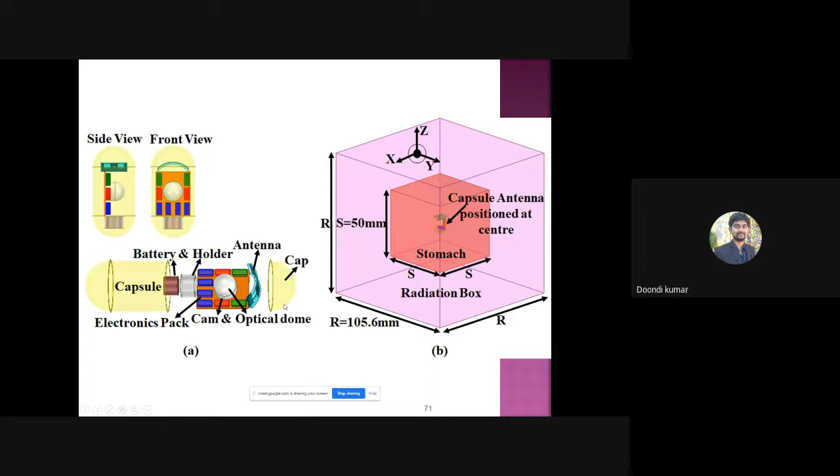How you place it is, you have an antenna, and behind this antenna, using a metamaterial concept, you can opt for one more layer here. With that layer effect, you can make sure that your antenna is operating at the same frequency, whether the circuit is there or not.

Why we perform this is: if we are able to detune that value, even if your antenna is tilted somewhat while soldering, that frequency will still work in the same application, the same operation band will be maintained. That proves your antenna is more robust to these detuning effects caused by the presence of other circuitry elements or other tissue elements. So that is another thing you can add to your biotelemetry application for endoscopy or implant.

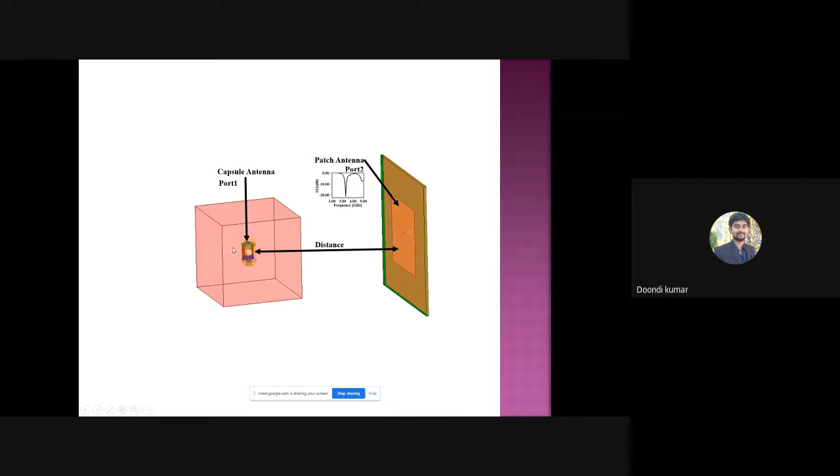Now I calculate S12 over different distances. This is the comparison. Obviously, if the distance is lesser, the coupling will be better. When the distance increases, the coupling will degrade. This is the analysis we are doing.

This will show that if the link is very weak, then automatically the information is lost. So with this analysis, you will know if your receiver signal strength is enough or not. If you know it is not enough, then you go for improving your antenna performance further, or you increase input power a little further until the SAR is maintained. You can go up to 2 milliwatts, meaning the SAR should be maintained up to 2 milliwatts.

If this value goes above minus 70 dB or minus 60 dB, then you can compare them. Then you will know, okay, I can give up to this power, and the received signal strength will be good enough for reception. That's what you learn based on this communication link strength analysis.

Similarly, use the budget analysis. This is what you are actually transmitting. This is what you are actually requiring. This is the minimum value. So the difference between them should be positive so that the communication link can be established.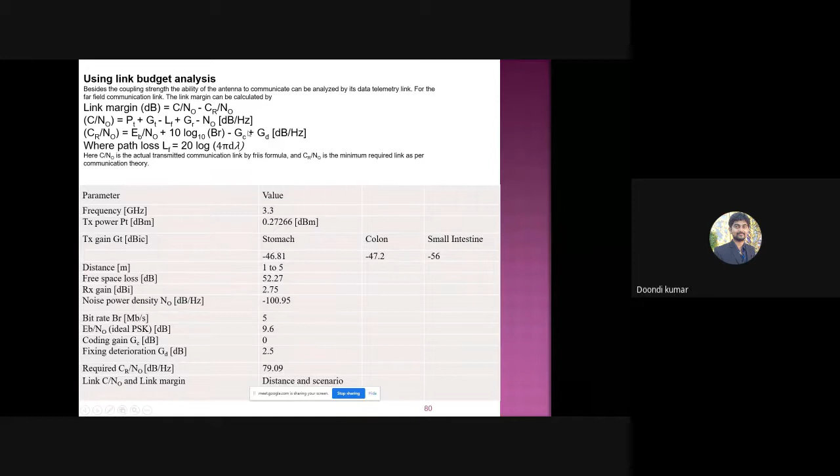So for link margin analysis, you can take this value. For my transmitting antenna and receiver antenna, I have again given my patch antenna. The transmitting antenna again is stomach, colon, small intestine here. So I use this equation. I have taken the margin analysis, and it is positive and maintaining the communication.

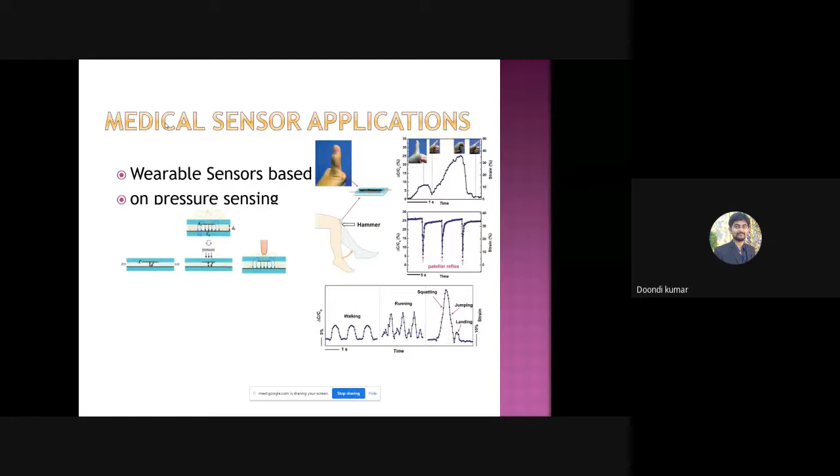Similarly, we work with medical sensors also, where the sensor will detect and the information will be transmitted with some other equipment. So this is the end of the theoretical presentation. I will now show you how we actually make the implant.

Let's take the same antenna. So you just have to make a cylinder the same way. Make sure it is at the center, so 0,0,0, and take the z direction from some -5 to +5, with radius some 4.5 mm or 9 mm, and height some 10 mm.

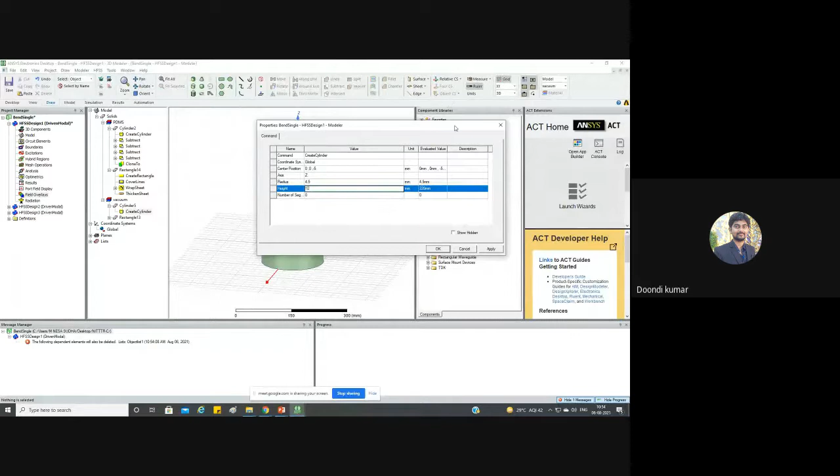So this is your small capsule. This is your small capsule. Similarly, go for Control C, Control V. Reduce or increase the radius by another 0.2 mm because the outer one won't have much thickness. Then Control C, Control V, and subtract. Now you have your center part.

How do you exactly get the top part and bottom part? Just take the spheres. Take the spheres at 0, 0, -5, radius 4.7. See, you got the bottom part.

Similarly, Control C, Control V. We give the 4.5 part for the smaller one, and this is the bigger one. Select them, subtract, and press OK.

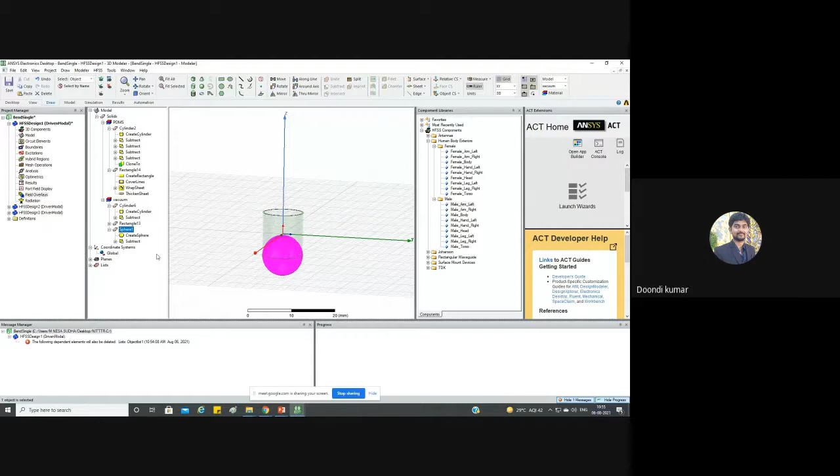Now here the sphere still has a little bit of an upper part that you have to remove. So in such a case, you have to take the box again.

Take the box dimensions again: minus 4.7, minus 4.7, minus 5. This is 9.4, this is also 9.4, and above you want to go 4.7.

So now you just select your sphere first, then select the box, and subtract. Now you can see only this particular part is left. You already have this part also, so you unite them both. Now you have the capsule bottom part.

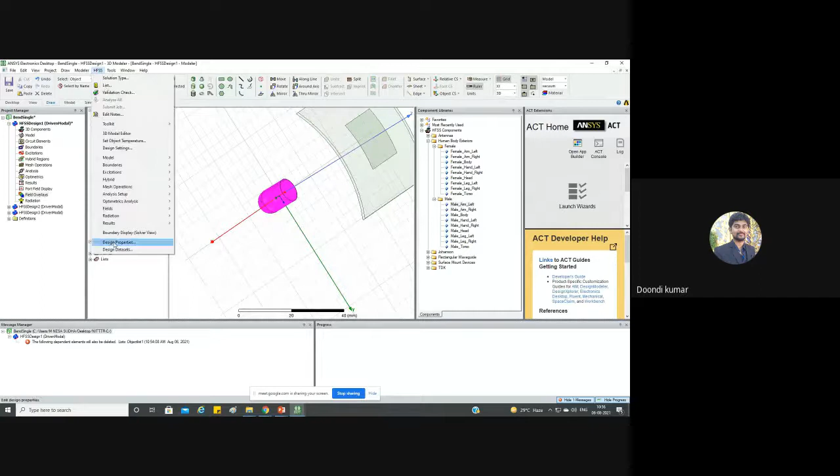Now you put this particular antenna size, making it as small as possible. Just SX is 5 mm and this one is also 5 mm. That's okay.

So for this particular one, go for front view. Here what you have to do is move it: edit, arrange, move. Put it here, then go for the move option again and adjust your coordinates so that it is exactly pasted inside the cap. Similarly, replicate the other one and put it inside the cap.

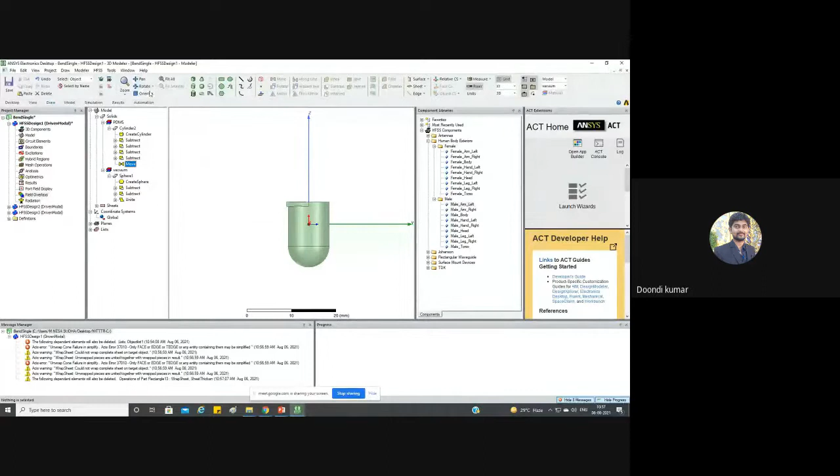In a similar way, you put the circuit, apply battery value, dielectric value, and for electronic parts you can go for perfect E value, and put all these things in. Once this is all over, you put your capsule inside your box again.

Take a bigger box, this one sized 50 mm, 50 mm, 50 mm, and for this box apply dielectric properties. Go for dielectric properties, add material, and give the stomach value, colon value, or anything based on endoscopy, and analyze it.

So you put that particular stomach value into the modeler object list. Go to the object list, then go for SAR settings, and put that stomach or colon into the SAR setting and evaluate it.

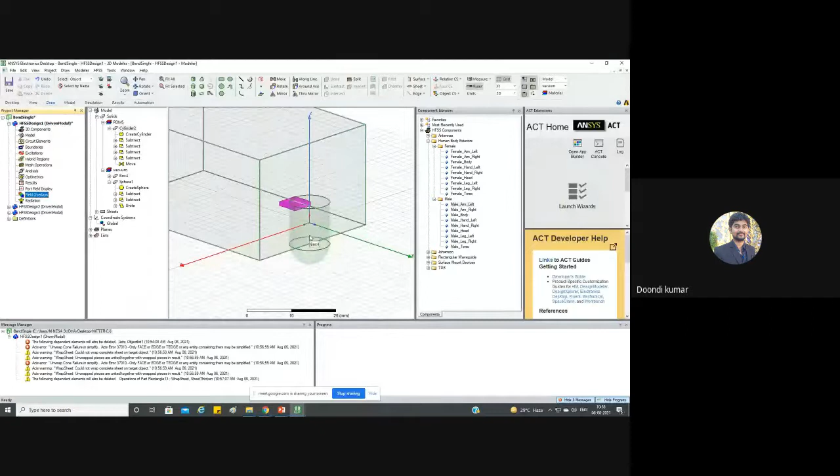This is the simple way you can go and get your endoscopy model or implant model. The simple steps: just create the cylinders and the cap, put your antenna in, make it flexible, wrap it, and move it. One suggestion: whatever design you are trying to make, make sure it is equivalent in all directions.

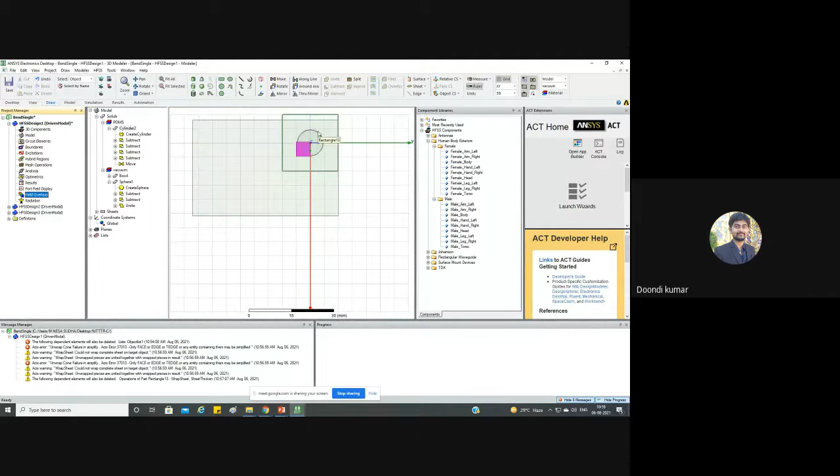Make sure the center is set as the center for all your designs so that it can be easily rotated or moved for your convenience. If you are designing your antenna only on the positive side, some people are comfortable with that, but orientation and moving will be a little bit difficult. So make sure you design in a manner that allows easy moving and orientation.

Suppose this capsule is here. In our case, we are trying to make a small size antenna that can be easily fitted inside the cap itself. But what majority of people do is wrap the antenna inside this particular capsule, so that the entire area can be used for the antenna, and if using a loop model, the overall current path can be increased.

This miniaturization makes shifting the antenna's operating frequency to a lower frequency much easier, because in medical antennas, especially in implant endoscopy, you try to work with lower frequency so that propagation path loss is less. Higher frequency causes more propagation path loss because of the high dielectric constant of human tissues.

So if you want to work with lower frequency, the antenna size will obviously be higher. But for implant and endoscopy applications, the main purpose of the design is to reduce antenna size. So you have to make loop models and similar structures to increase the overall current path and achieve miniaturization. You can actually wrap it inside the cylinder as well.

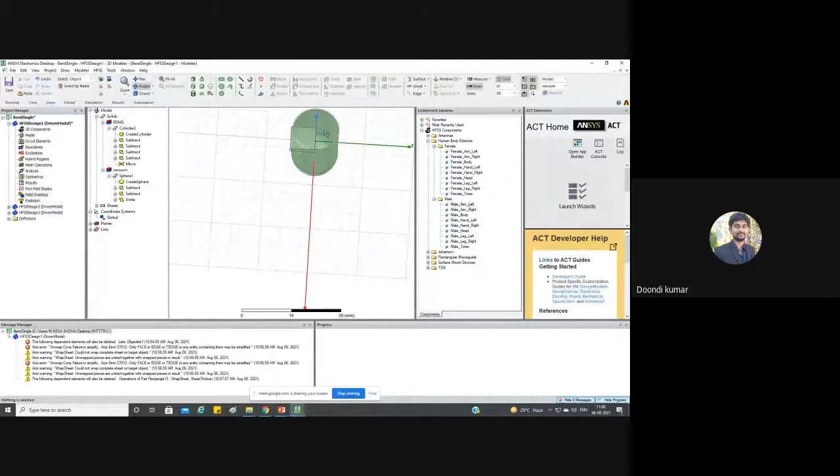Now I have detached the cap part. Similarly, once you make your cylinder, you cut half part of the cylinder, take that half part, make your antenna and wrap it inside. Then you replace whatever you cut, and you have a design where the antenna is wrapped inside the circuit. Apply the excitation, put in the circuitry part, and follow the same process.

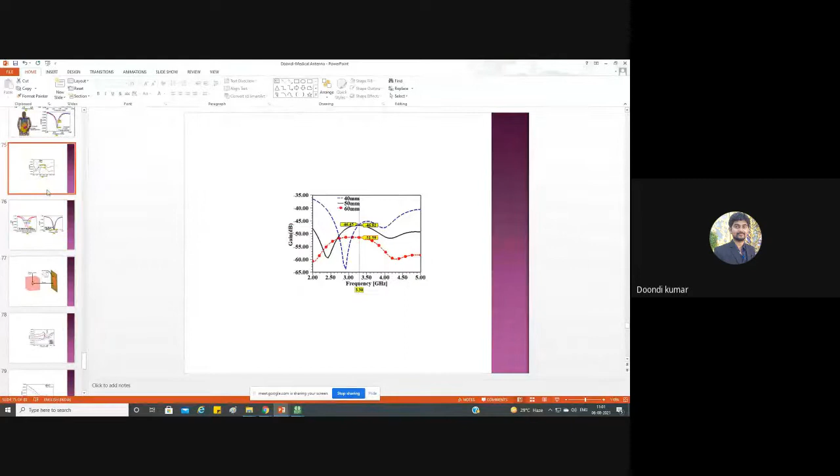Make sure that you present different kinds of analysis effects: dimensional effects, parametric studies, SAR analysis, different tilting and how it may affect performance, and overall how you improve the robustness of your antenna, including how the reflection coefficient behaves when traveling through different organs. You can get gain or efficiency values under different tissue sizes, and go for detuning to improve the robustness of your implantable antenna so it can transmit properly to the outside.

Whether you use a solvent model or general HFSS is fine. If you are using the solvent model, directly go to transmit TX to RX coupling analysis, and you can get the power directly in dB versus distance, and also versus frequency. This lets you establish the communication link and check whether your antenna is transmitting enough.

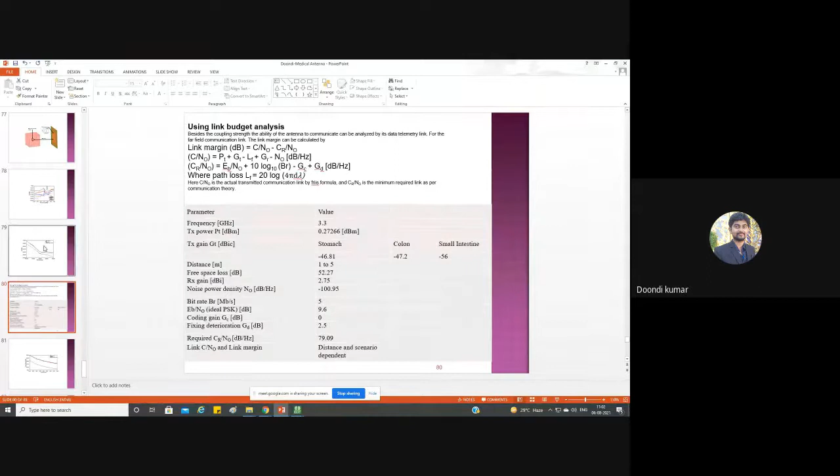If it is not transmitting enough, try to improve the performance of your antenna further. So you establish everything, including the actual required power at the receiving side - what it is actually transmitting - based on the analysis you've done. You will know your power, transmitting gain, and everything. Substitute it here, and you will know the link margin value too, so you can establish that your antenna is working and maintaining signal power up to some distance.

So overall, what you are doing in the end is making a flexible antenna. It can be bent and put inside capsules very easily, whether at the center part of the capsule or the edge part of the cap - you can mold it and put it in easily.

You are also taking care of other circuitry or tissue element effects on the impedance matching and overall antenna performance, improving it as needed, and establishing the communication link to present that it is monitoring and transmitting the collected information. This overall proves that the flexible antenna you designed is working and transmitting the monitored information. You present this for implantable, endoscopy, or outside antennas, establish it properly, and you can go for patenting or paper very easily.

So you can go for IEEE APS, IEEE AWPL, IEEE TBioCAS (Biomedical Circuits and Systems), Taylor and Francis Electromagnetics in Biology and Medicine, Wiley MOTL, Wiley Microwave and Optical Technology Letters. Elsewhere, some journals like AEU are accepting these articles. Computers in Biology is accepting endoscopy and implantable biomedical antennas, and Ambient Intelligence and Humanized Computing, another Springer journal, is also accepting them. Personal Communications, you can go for as well. So these are the different kinds of journals that are accepting biomedical antenna papers.

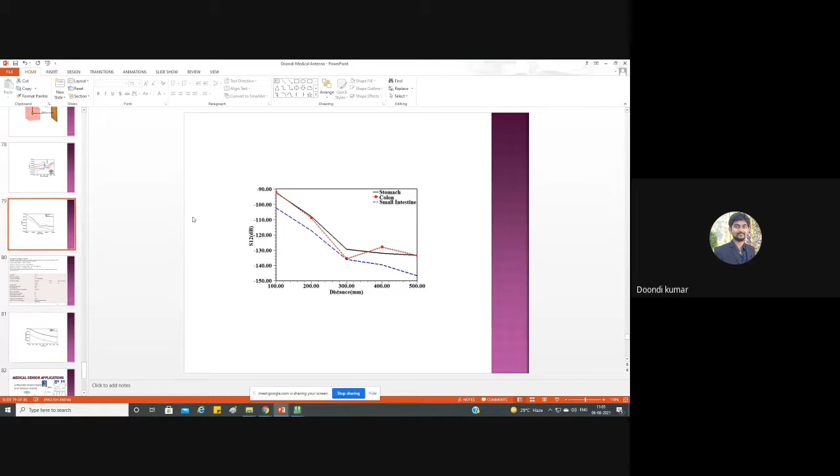Sir, just now you showed one capsule-based wearable antenna, designed in HFSS. But the results, how are those graphs displayed? How are the graphs obtained, in the last slide you showed? For those, you have to take individual values and plot the graphs in Excel, or you can take these values and put them in HFSS again and project them. These are individual values; I took readings by distances and took the values in individual tissue and projected them again. The last two graphs are automatically computed in HFSS and presented.

Can you show us the slide of the dielectric and thermal properties which you have taken? Actually, I'm working with CST. For the design of breast modeling and tumors, I generally prefer the database of IT'IS Switzerland Foundation. You can prefer that, sir, if you're working on tumor detection. No sir, I'm working on hyperthermia — microstrip antenna development for the application of breast hyperthermia.

Actually sir, this tissue data I am taking from the same website. If you want to go for malignant tissues, and if you want to establish that your hyperthermia is targeting exactly that tissue part, first the diagnosis is important, so you should start from malignant tissue data. You can go for IOP Sciences papers, sir — they cover breast cancer, colon cancer, and thyroid cancer over 18 gigahertz in their articles. You can collect tissue properties from there, and for healthy tissues you can use the C. Gabriel dielectric tissue database.